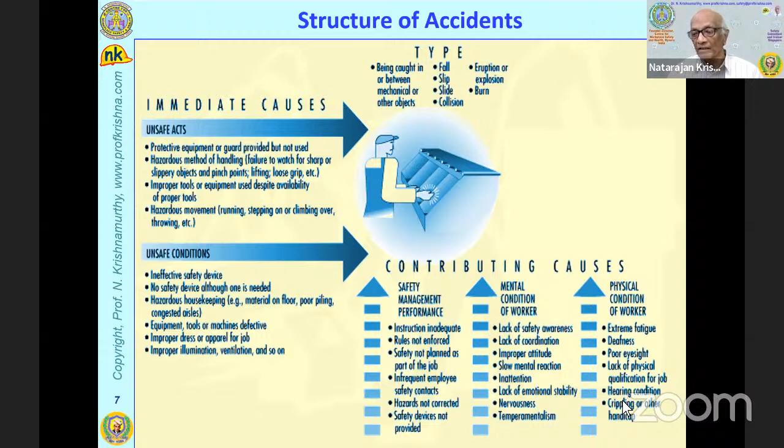You know, I stayed in the West for 20 years and also have visited it frequently. I see one difference between West and East. We are ashamed of our mistakes. The West is not ashamed. They are not proud, but they want to share and correct themselves. So I think your generation, modern Indians, should not be ashamed.

It happens to everybody. Even people like Bill Gates and Einstein and so on have made mistakes. So it's okay, and it's okay to share them and then correct ourselves. And the advantage of sharing them is so that others will not make the same mistake. So why study accidents? To find out what actually happened, what went wrong, and how it could have been prevented, what and who, if any, were responsible for it.

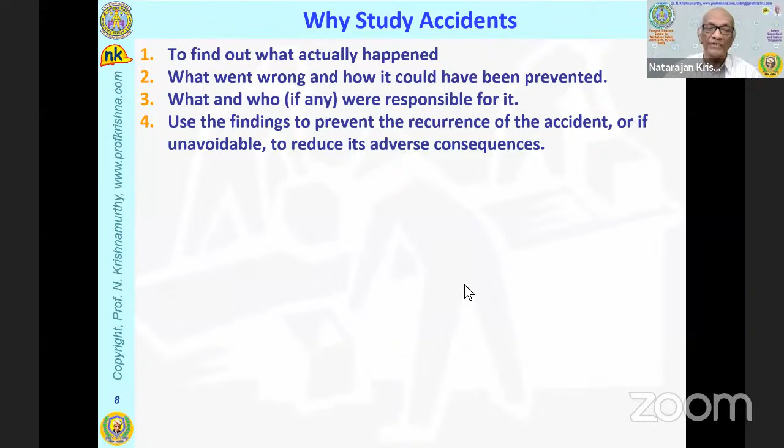Investigators do not find the culprits. That is the business of the police, the court, and so on. So accident investigators want to find out what went wrong and how it could have been prevented. That's all. They submit a report and use the findings to prevent the recurrence of the accident, or if it is unavoidable, to reduce its adverse consequences. That then leads to risk assessment and control. That's a separate topic in itself.

That is, find out what is risk assessment and control: identify the dangers that can cause accidents. How do you know them? From accident study. So it's a cycle. Assess the likelihood, the probability of its happening, the severity when it happens, how bad it is, determine the level of the risk, determine and implement the appropriate controls. This is risk management. Risk management, therefore, is a leading indicator. It's a predictor of what can go wrong.

So people must now get interested in risk management. The government of India is also planning to bring that in as part of the Factories Act. Risk management is a predictor of accidents. For workplace safety and health, it's essential to anticipate and manage accidents. So you see, why study accidents? You investigate an accident, you find the causes, then you do the risk management that can help you prevent accidents. So if you want to prevent accidents, reduce accidents, you must investigate accidents.

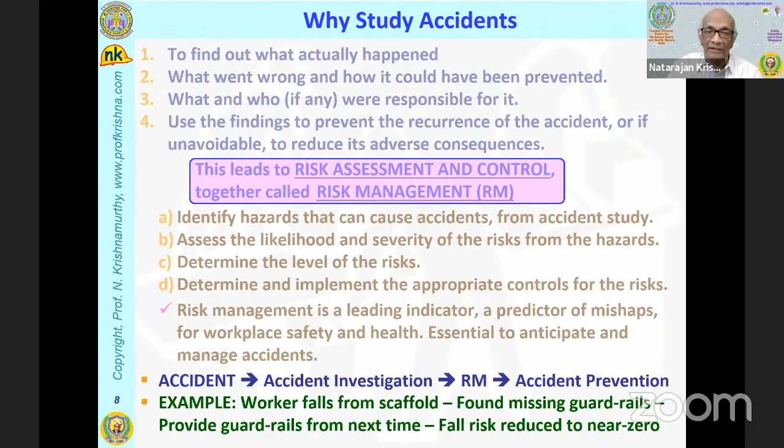As simple as that. No use in hiding them, no use in being ashamed of them, no use in covering it up. You cover it up, it will come back and haunt you. It will hurt you. So for example, suppose a worker falls from the scaffold. Accident investigation reveals there were no guardrails in a certain portion. Then provide the guardrails and the next accident won't happen. You cannot reverse the time and make the accident not happen, but at least you can prevent it from happening again. So that is why we study accidents.

So what is forensic engineering? The word forensic, very simple, comes from the word forum. And the word forum means a group meeting, a group discussion. The only difference is in this group discussion, we do not want to just gossip, just chat and so on. We want to be able to prove what we are saying is right. What we found is correct, not a guess, not an opinion.

So forensic engineering means evidence, facts, logic, and future help. No opinions unless it's from an expert. Even then it will be counted as expert opinion and not evidence. So I'll give you more examples. Forensic means it must stand in a court of law. Whatever you say should not just be satisfying to your wife or children or husband and so on, not to your family alone, not just so that everybody will praise you.

Oh, how smart my boy is.

But it must stand in a court of law. And it may not be exactly what you think. There are lawyers on both sides. So today forensic means appropriate for court of law or for public. Panchayat is okay. It doesn't have to be a state court or a federal court, a central government court or

Supreme Court. Panchayat, any group of people who are eligible or qualified to judge relating to debate or argument, rhetorical, that is, people must be able to speak and express themselves. And it must relate to the use of science or technology. It cannot be philosophy. You cannot prove.

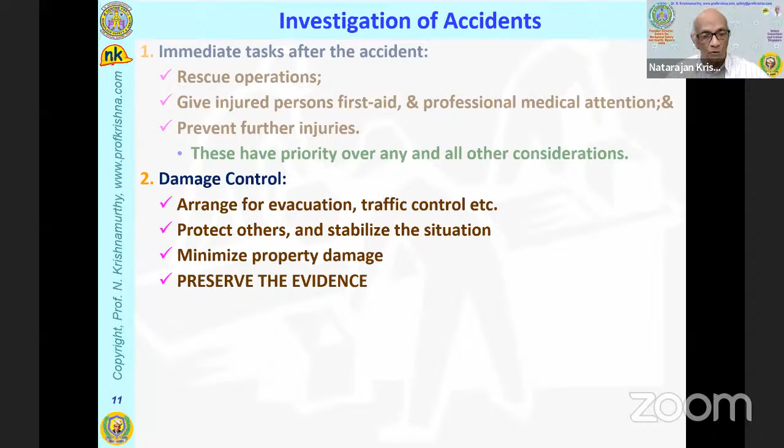First, gather preliminary information. Visit the site. This is not always possible. My experience, I'm called after everything is over, cleaned out and so on, but I'll talk about it. Collect the facts, collect data. Do the interviews of eyewitnesses, and then collect CCTVs and so on, all the data, then analyze the data. Experimental analysis, mathematical analysis, or other methods. Then do the report writing. This is the procedure.

Further considerations: report the accident first to a designated person. Unless you are the boss, don't think you know everything and keep quiet. Don't inform the family immediately, because wrong information will go there. Inform your boss, your designated person, correctly observe the conditions, take pictures. If you have a camera, and today everybody has a camera, record it, but don't arrange things.

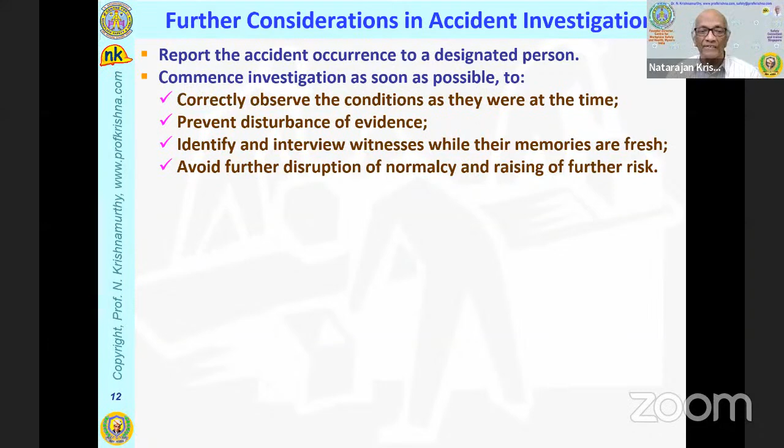Prevent disturbance of evidence. Identify and interview witnesses, avoid further disruption of normalcy and raising further risk. The more people gather, the more risk there is. Personnel, facilities, pencil, paper, this is for the investigator. All of this you must have. If you are an investigator, you need everything. You must plan for it. You cannot just go there and say bring me a paper, bring me a pen and so on.

Legal criteria and constraints always take precedence. Sooner or later, the case may go to court, especially if there is major injury or death or property damage, it will go to court. So it is the lawyers that will argue and the judge must decide. So everything that you do must be legal. If it is not legal, it's only philosophy and it may or may not stand up in court.

Report the findings, make corrective and proactive recommendations, develop a plan for corrective action, implement the plan, evaluate the effectiveness, and make changes for continuous improvement. What is the whole purpose of this exercise? We want to reduce the accidents. So if it is just a paper published or an award or a medal or something, it's no good. What you do must end up in improving the life.

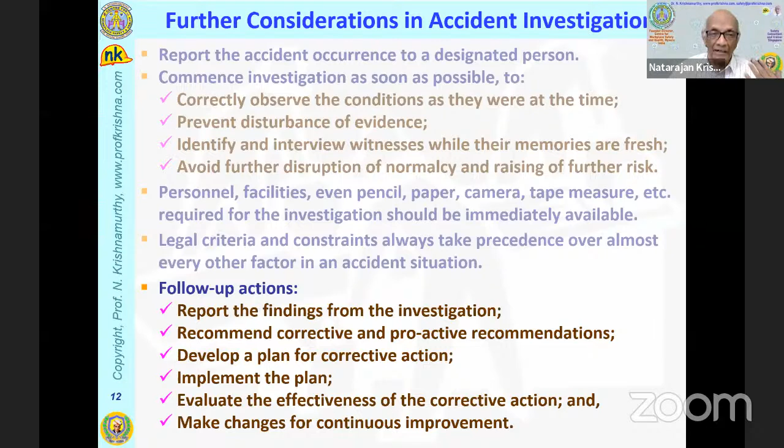Your active participation in it must leave this place better than you found it. In fact, even the definition of an engineer is somebody who solves problems and leaves the world better. Today, we are leaving the world worse than it was. What are the basics of forensic engineering? Physical evidence. Evidence, evidence, evidence. If it is not evidence, it is just gossip. Just because a big guy says, I think it should be like this, I think it was him, it won't fly.

Before attempting to gather information, examine the site in a quick overview. Take steps to preserve the evidence and identify all the witnesses. Talk to them before they get mixed up. Somebody saw something and he speaks to his friends, and his friends pat his back and say, it's not like that, fellow, it should have been like that. And slowly he changes his mind. Also people forget. And people imagine things to become heroes, or so they won't be villains. So even if it is a mistake, he says, no, it cannot be. So in fact, interviewing witnesses is an art. There is a whole training course for it.

Now, in many jurisdictions, the accident site must not be disturbed. There will be a yellow tape or a red tape and people must not come in. Normally, in most advanced countries, next to the ambulance, next to the police, come forensic engineers. Only then the family, weeping and so on. That's okay, but they're not going to help. In America, I know for a fact, the forensic team goes with the ambulance or the police. In fact, sometimes the forensic engineer gets precedence over the police, unless somebody's life is in danger. Then the police come in only to see if there is a crime to be charged. So in India, I think we have got a long way to go.

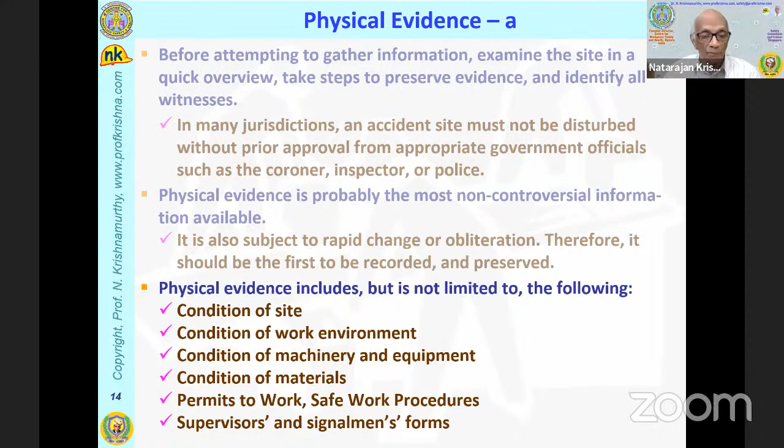So it's all based on documentation. Then if you're asked to investigate, in the olden days, we used to sketch by hand. Even today, hand sketching is a skill because photographs may not indicate some of the details that you want to show. So you make a quick sketch. So the investigator must know sketching.

He cannot say, hey, come here and sketch this. That is not a good investigator. He must know what he's doing. He must be able to do what he wants others to do, unless it's too heavy to lift and so on. Distances, dimensions, directions must be noted, even approximate. Broken equipment, debris, samples of materials may be removed for further analysis.

Take a photograph, make a note, then remove it and see what is underneath. Don't go and move it up. Oh, I got to see what is underneath. Because how it was covering, why it was not moved, all these will become important. Even if photographs are taken, written notes about the location of this.

These days, of course, your cameras record even latitude and longitude. So metadata is very useful to you. But in the olden days, we had to make notes for every picture you took. I used to do that. Then you must remember to take permission. This is something which I have seen happen in the US.

Somebody takes a picture and presents it in court, and somebody's face appears there. He can immediately make a stop and say, this photo, he didn't take my permission. I am not interested in appearing in public or in court. So it is removed from the evidence. So if you're including somebody recognizable, then you must take permission to enter the site, take photographs, talk to a person.

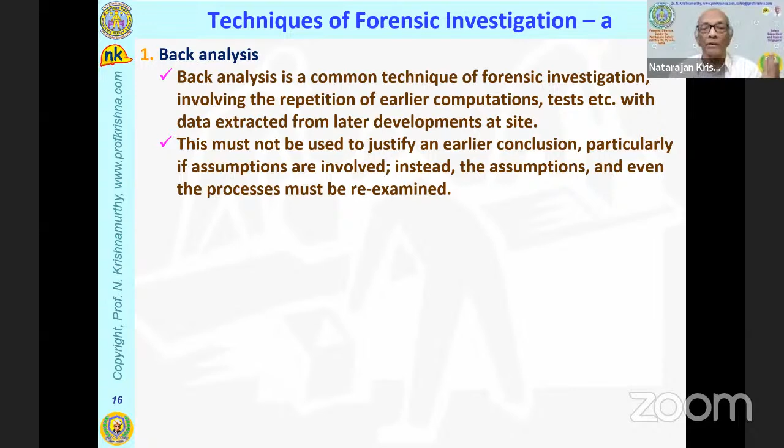In fact, you don't know the properties of soils. Many times the accidents reveal the true property of soils which you have assumed wrongly. Many times an accident shows you something which you did not include in your computer analysis of structures. Then rebuilding. For instance, put back together whatever was broken. Then you may see which one was bent or broken into more pieces, which failed first and so on.

Simulation. Simulation can be physical simulation or computer simulation. Simulation is imitating and creating a similar situation. For instance, you can simulate a scene by actors. Many times you see a video as if it is very real, but it is actors. Who is holding a camera expecting an accident to happen? These days, CCTVs, of course, are your best friend. Many times, today's police and doctors have a very easy life compared to the days I grew through.

Because today, somewhere or other, in some serial, some story, some movie, there's that CCTV, this CCTV, and then you capture the victim. And in America, they're very familiar with CCTVs. The robbers come with face masks and they wave to the CCTV.

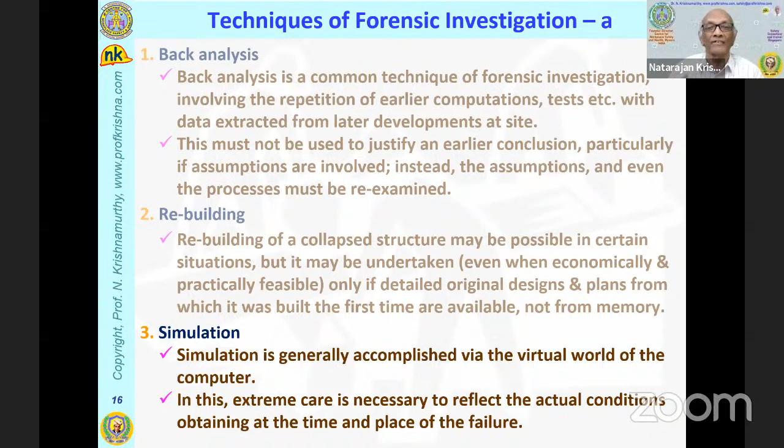But there are techniques available today where, from the eyes, which they have to keep open, they enlarge the eye, they pixelate it, and they do some magical things with it, and you can even see reflections of others in the area. I'm talking too much because I'm so excited about what is possible in forensic imaging. Simulation is a very common thing. I have done a lot of it myself.

Reenactment, of course, is risky because you are talking about putting people into the scene. Reenactment means, suppose two people fell down somewhere, you cannot make two people fall again. So reenactment is for not so injurious, not so risky things. You can make them. Show me how you walked, then these actors will walk. Was it like that? No, our shoulders knocked at each other. So walk so that shoulders knock at each other. Could it have toppled this pillar?

So that is reenactment. If the investigator decides to rebuild or reenact, it must not result in a repetition of the damage. Reenactment means don't repeat the injury, don't repeat the damage, only repeat the action, so that you can see the reactions, you can see the movements, you can see what causes a shadow, so he did not see where he was going. So stuntmen are often employed for reenactments.

Root cause analysis, in fact, is a very interesting subject. How do we find what could cause an accident? There are many, many methods. I may not have time to talk about it. Fishbone is a very common one. Ishikawa, a Japanese scientist, thought of this. And it's very commonly used to go backwards from accidents to find, could this have caused it? Could this have caused it?

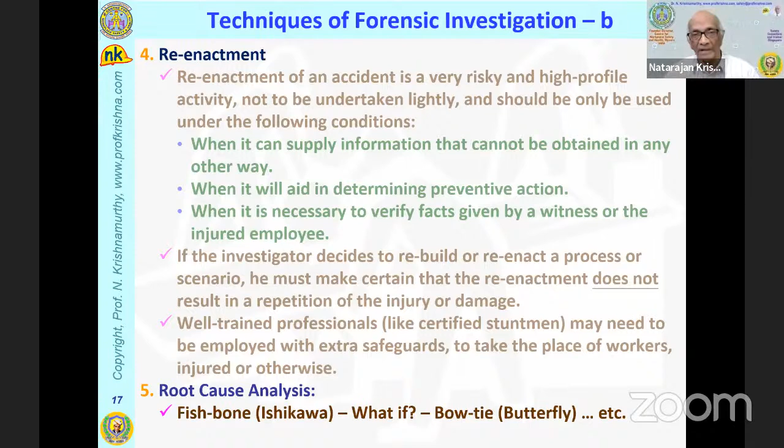I have been an expert witness. Who is an expert witness? A forensic engineer investigates accidents. But then it has to be proved in court. Not all forensic engineers are competent to present it in court. Because to present it in court, as I said in the opening remarks, you need to have a very good background in whatever you are talking about.

You can talk about anything, but you must show it. Is your PhD in that? No, sir, my PhD is not. Then why are you talking about it? Oh, because I worked in this company and in this area. For how long have you done this? One question a lawyer may ask you is, a 50-year-old American lady fell in a tourist spot from 20 meters. So suppose I go as an expert witness.

The other lawyer will ask, have you had experience of a 50-year-old American lady falling 20 meters? No. No, but... no buts. Yes or no? No, Your Honor. You cannot say no, sir. No, Your Honor. Then why do you feel qualified to do that?

Okay, this has happened. So I say, I investigate accidents of 50-year-old Asians. I've seen accidents of falling 20 meters by others. And I've seen accidents of Americans and Australians and so on. So I put it together, and as a person with enough scientific background, I am able to put it together. The judge will rule, okay, you are qualified as an expert witness. If you cannot say any of these, goodbye, thank you, sir, for your time, the next witness.

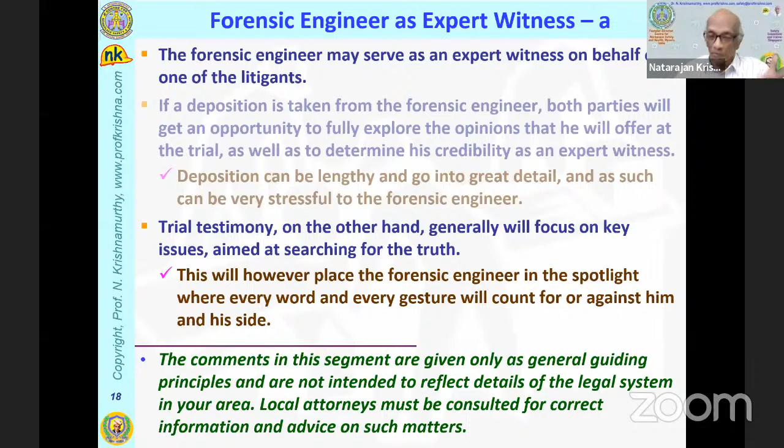Suppose in America, for instance, one was divorced recently. Then they'll say, what was the state of your mind? Your wife divorced you last week. How do you think you are capable of judging this? I don't want to frighten you, but it's very challenging. And when you feel on top of it, you feel so good. Trial testimony, anyway, I will not talk about again, another talk maybe.

So a forensic engineer is in the unique position of not being part of the dispute. A lawyer has to argue for his client. A forensic engineer as expert witness has no client. Even though one of the parties will pay, he's not expected to prove his client is innocent or guilty. He presents scientific fact. If he argues prejudicially in favor of one side or the other, he'll be kicked out. He will become the laughing stock of the entire professional community, and he won't be called as a witness or an expert again.

Anyway, if both sides agree, they can have a mediation and so on. And he must be non-partisan and pursuing truth. Satyameva Jayate is applicable to forensic engineers. Maybe it should apply to all engineers, but they all have agendas. He or she is often treated as amicus curiae, friend of the court. He is supposed to be a friend of the court, not a lawyer for one side.

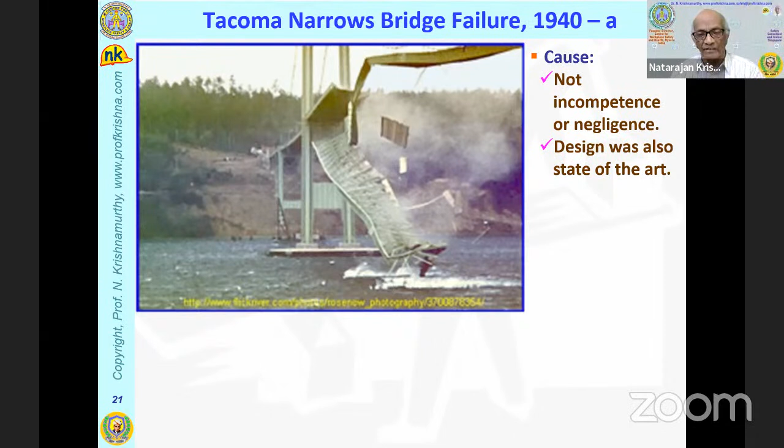So I will now take a little time on famous, or maybe not famous, notorious, structural failures. I'm limiting myself to what is well known. Many of you may also know them. I'm putting it chronologically. 1940: before that there were failures, but not enough forensic engineering. This is a famous bridge, the Tacoma Narrows Bridge. It was not incompetence, it was not negligence, and the design was state of the art. It was built well, designed well as far as the knowledge went, but it was simply insufficient knowledge at the time. Nobody is to blame.

But they found out what the problem was, something they had not known: resonance of flexible structures under aeroelastic flutter, vortex shedding. When something is moving, the wind becomes a vortex like a spiral, and that makes a resonance oscillation. It was not known at the time. After that, a lot of research was done. Luckily, no human life was lost, and the failure led to significant advances. I'll show you a 1-minute video on how it went.

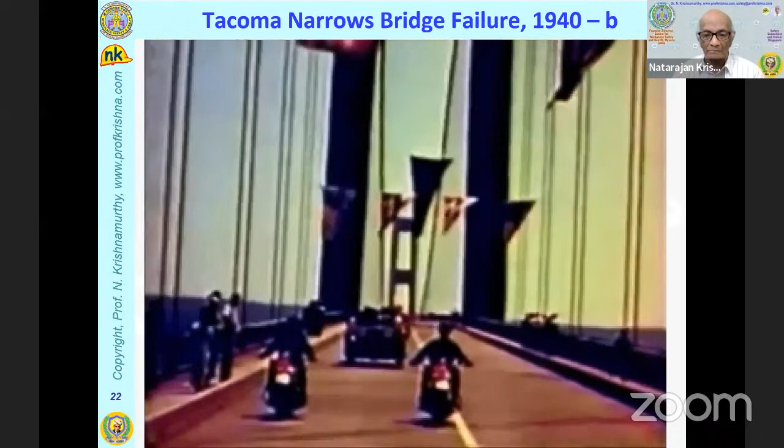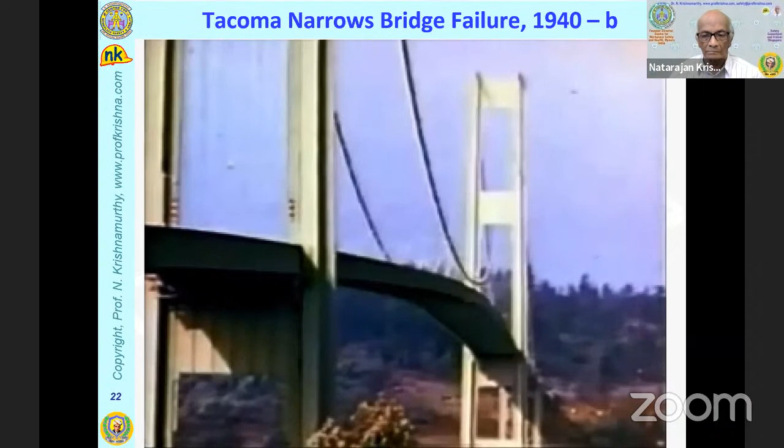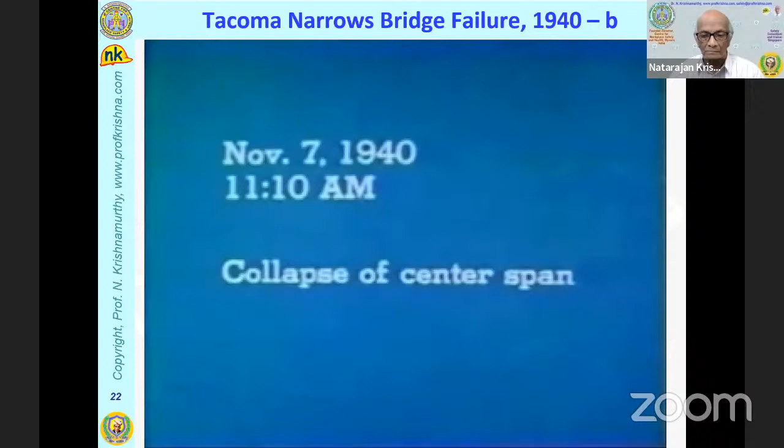As you can see, this bridge was exceptionally long and narrow, over half a mile long, only 39 feet wide. It lasted just 4 months. Here's opening day. And then the gusts started. On November 7th, the bridge suddenly went into a twisting motion. The wind speed was a steady 42 miles per hour. This was enough to keep the bridge oscillating in one of its natural modes of vibration with a period of 5 seconds. Real time. It's remarkable that the girders were this flexible. This is photographed at normal speed. However, a collapse was inevitable after a little more than an hour of this. Collapsed.

Okay, the reason I showed that was not how exciting it is. That was in 1940. 60 years later, a similar thing happened. In spite of all the computers, all the technological advances we had made in 60 years, still a similar ignorance. In 2000, the Millennium Bridge in London was opened by the Queen. It was designed by the world's top designers, built by the world's top erectors and contractors, and the Queen cut the ribbon, and watch what happens. It is just half a minute, but watch.

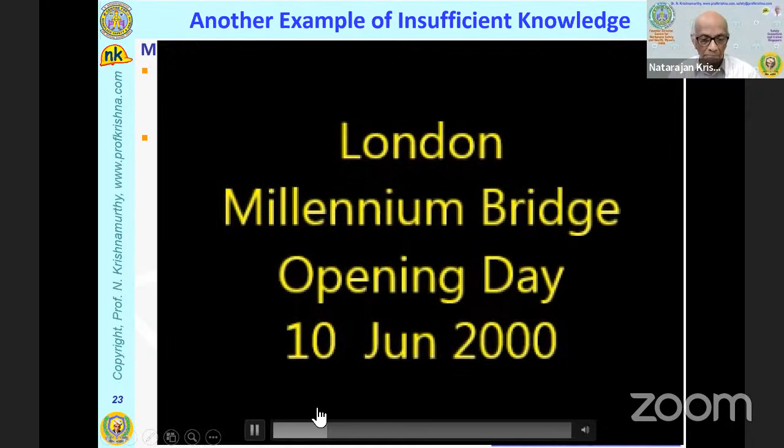This is opening day. Just after so much knowledge, it goes to show that human beings are catching up with nature and with the world. There will never be a time when we understand everything, because then we won't be human.

So it took them 2 years and 5 million pounds to correct it. If that was vortex shedding, this was called synchronous. They give nice names after they find something, but it shows that human beings are still chasing reality, trying to find the truth. But now they know.

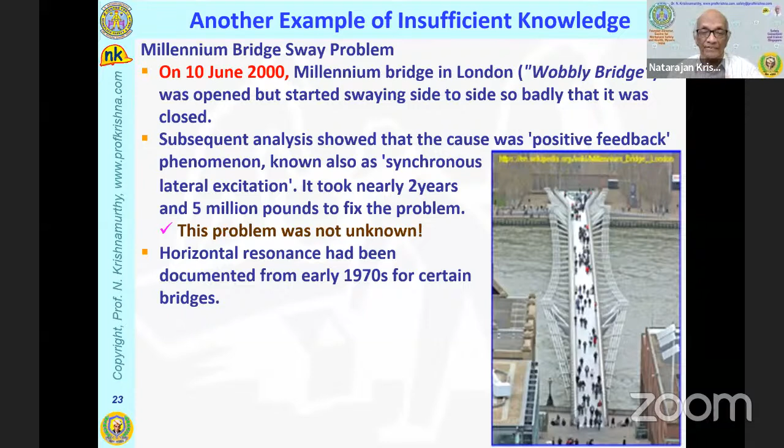So it's very costly. But in this case, they had no excuse, because horizontal resonance had been documented from the 1970s. They didn't read the right papers. It depends on luck also. If they had read one paper, they would have put it into the mix, conducted a risk assessment, and done some calculation. So I will show you a few more before I go on to my own stories.

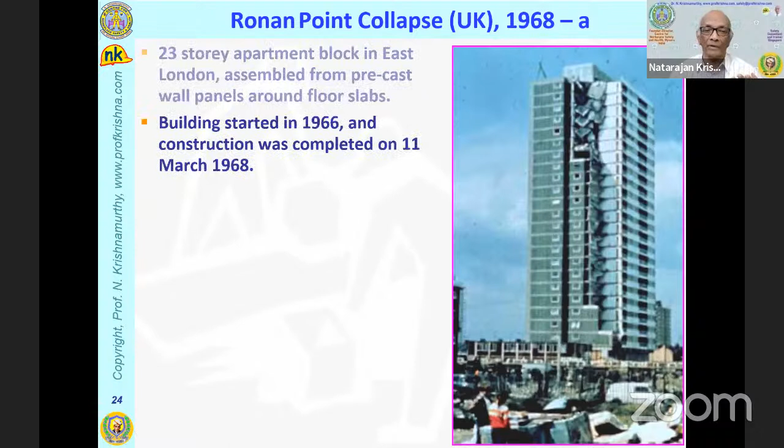Then this is UK 1968, a 23-story apartment, East London. It's very simple. It's an RC structure, okay? And a gas leak on the highest floor blew out the wall. It was a precast building. So the walls were precast, the slabs were precast, and they were supposed to be connected very integrally by in situ concrete. But of course, like human beings, they found newspapers inside the concrete. Don't worry, it happens all over the world. It may not happen again, but it happened then.

So when it blew out the wall, the ceiling could not support itself, it fell down. The connections were very bad. When it fell on that floor, twice the load and shock impact factor, the next floor fell. So it fell floor after floor after floor, and the entire floors collapsed. Very embarrassing. 4 died and 17 injured. They conducted a lot of tests, and to give them credit, they found that workmanship was not perfect, and no structural redundancy.

I'll take a few seconds to explain this. Redundant means extra. Now, I'll talk to you honestly. If as an engineer, designer, I tell my client, you know, this 4x8 steel beam is enough, but I suggest we give 5x10 so that we'll have something extra for emergencies, he'll say, goodbye, I'll go to somebody else.

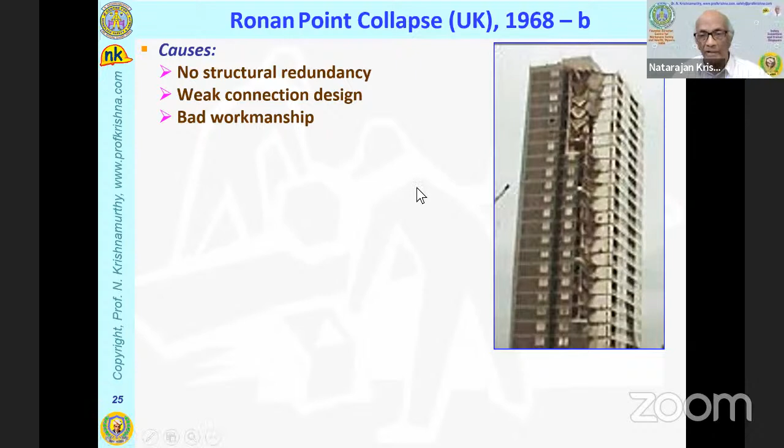But today it's not going to happen. Whether it's America or India, redundancy is a bad word, but bad workmanship can be corrected. And it led to major changes in building regulations covering safeguards against disproportionate collapse. New buildings were supposed to take even the explosive charges, and existing buildings were allowed a little bit less.

And then, because one block was found to be bad, they felt that they could not trust the others. All the 9 blocks were demolished. Of course, the contractor lost. Maybe the insurance covered most of it. But look at the brave decision they took.

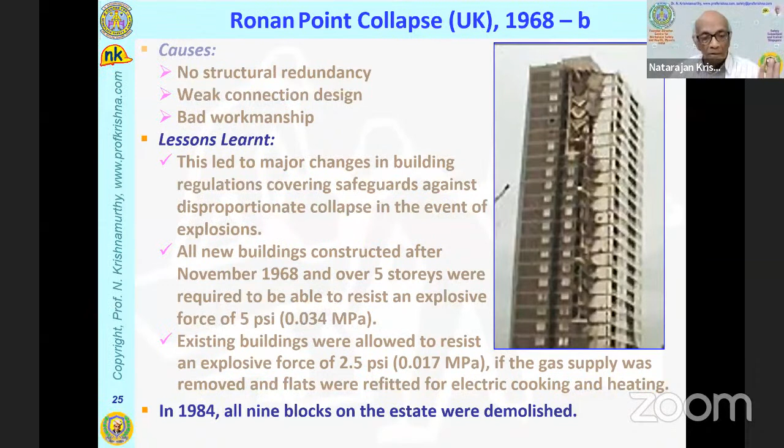Contrast it with a common practice. I won't mention the country. A common practice of a building designed for 3 floors. And after that, the new buyer adds 2 floors. His son adds 2 more floors, and then there's a collapse. So they demolished all of it because they didn't want to risk it.

Coming to computers. I was with mainframes in 1959 in the US. So don't think because I am old, I don't like computers. I love computers. I spend 6 hours a day with computers. Okay. So this was the first 3-dimensional truss design program by computers. I have done similar things because in those days, there were no packages. There were no teams. Most of it was a one-man show. You wrote the program, you punched the cards, you took it to the computer center, you checked the answers, and you proved that your answers were right by experiments and so on.

So this one-man or 2-man show produced a computer program in the 1970s. That was when 2-dimensional programs were fairly established. 3-dimensional programs were just coming into vogue. So there was a stadium, and for the roof, they used this 3-dimensional pod. It's like an inverted pyramid, and all these put together for a 110 meter by 91 meter space frame. It's not a plane frame, it's a space frame. And it served for 5 years.

It was built in 1973, served well for 5 years, but somehow in 1978, overnight, it collapsed. Just a few hours before, in the evening, there had been a huge game and thousands of people were sitting there. Somehow they were lucky, because if it had collapsed when the stadium was full, thousands of people would have died.

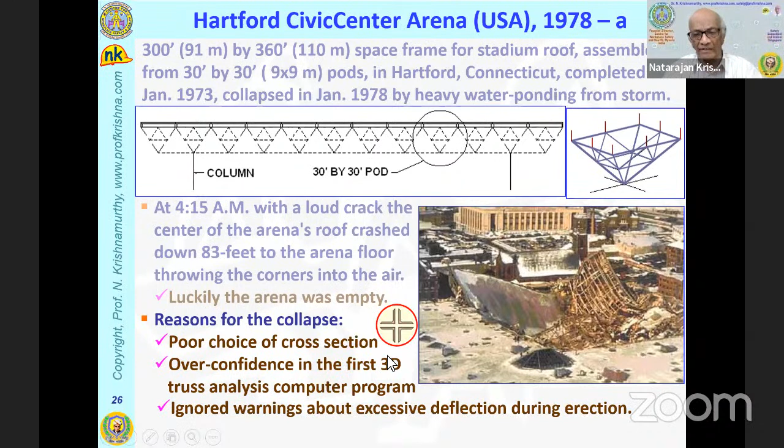So reasons, many reasons. Structurally, for instance, if I gave you 4 angles, how would you put them together for best effect? Common sense tells us it should be square. But for some reason, probably thinking of connection being easy, they put it exactly the other way around. Instead of putting it this way, they put it this way. So that meant that the moment of inertia, the radius of gyration were all very small. So that was one reason.

Then the overconfidence in the computer program. Even today, especially the younger generation is so confident about computers. They are thinking computer is better than my mother, my father, my teacher, Mata, Pita, Guru, Devo, beyond everything. These were written by human beings. Whenever human beings write it, it cannot be perfect. I'm not against human perfection. But once you become perfect, we reach a higher plane anyway.

So they assumed that because the computers did things fast, what they took 1 week, it did in those days in 5 minutes. Today, it will take 5 microseconds. They thought it was terrific, tremendous. So they believed in it. And it started warning them.

I almost give a soul to structures. I say the structure is screaming, trying to tell you something. I'm going, please help me, please save me, or please get out. Even if I die, I don't want you to die. That's what the structures tell you. But we don't listen. It has happened in Singapore. It has happened in Bangladesh. It probably is happening in India. Why probably? I know it is happening in India.

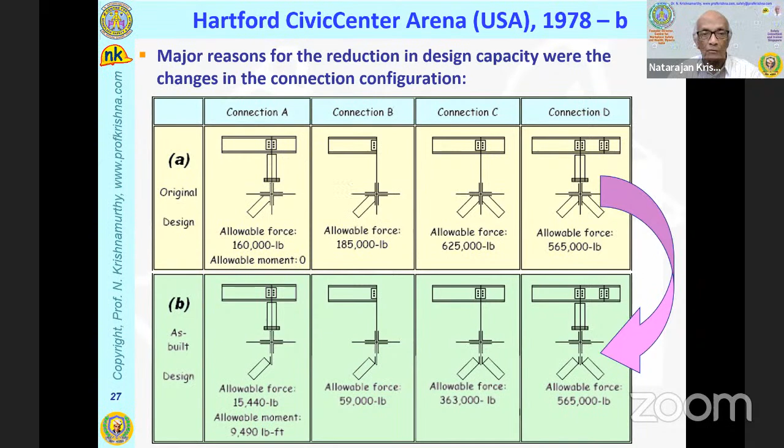Look at the allowable force in the design, it was designed for 160,000 pounds. But once he moved it, it can take only 15,440, 1/10 of it. 1/10 of it. And it put in moment because it's eccentric. Similarly, second, third one, only the fourth one, there is no change because it happens to be symmetric. So you see the problem? And this is going to happen again. I got 1 or 2 more cases of that. So that is the reason.

And after that, of course, they found, after analysis, they blamed the program and they blamed the people who said, don't worry about the deflections. The computer program has said that, you fix it somehow. So this was the way they went ahead and did it. 3 outcomes: the compression members, the fabricated ones were overloaded, the compression members were overloaded, then all the members were overloaded because of the shifting of the connections.

In addition to the design errors, there is bracing. Bracing is to prevent a long buckling length, you brace it in the middle so that your load capacity increases 4 times. I think you know that. So midpoint braces were omitted because bracing was not considered that important from a computer program point of view.

So they merely followed the computer program's directions and forgot their engineering background. Then the bracing, instead of 15 feet intervals, they put it at 30 feet, and then insufficient bracing. So all these put together, depending too much on the computer analysis. I am trying to share some lessons. Computers, however, are only as good as their programmer, as good as their software. And one shouldn't be too arrogant that he has done a good design. It depends on the software.

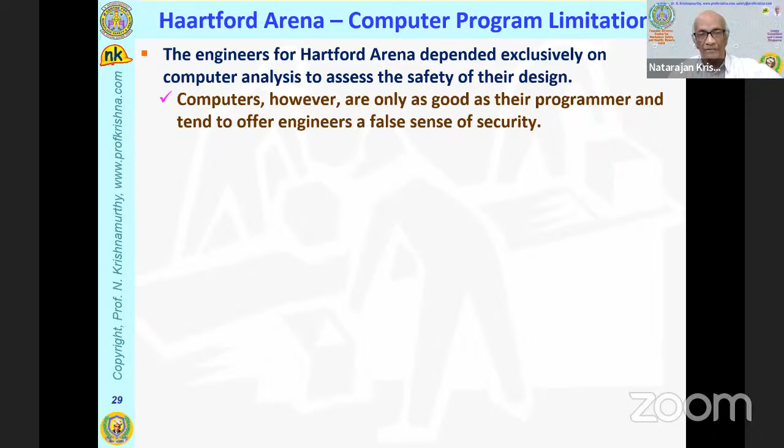Public was thinking, oh, the computer is a blessing. It's a panacea for all ills. It's a blessing to mankind. I want my children to learn computers. The computer is the silliest, dumbest machine in the world. It can only count 0 and 1. It's the programmer. It's the program. And programs have been gradually improving over the last 30, 40 years. Today, almost all programs are as near perfect as the existing knowledge goes. But unfortunately, I'll point out some limitations.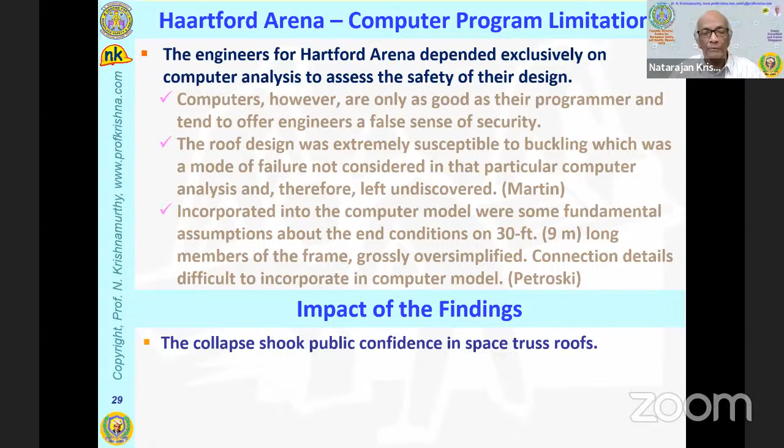President Ford of the United States said, this is one example, let us check all the other things and let us do water load testing when there are no people present. And then they said, let the programs grow slowly. That's what they did. Okay, then the lessons learned, of course, I'm repeating: ensure that the computer analysis covers all the modes of failure. If it cannot, check it out by conventional methods.

Very unfashionable, very unpopular. I tell my class, okay, you got a software program. I'll give you a simple example. You do it by hand. By hand? Me? I know I can do it on this small work laptop. Why do you want me to?

I wrote a book on computer graphics. My nephew tells me, Uncle, why did you write a book on computer graphics? I touch C, I get a circle. I put R, I get a rectangle. Why do I need it? So if I ask you to draw a rectangle 3 inches by 5 inches, what will you do if you don't have a computer? I won't do it. I don't want a rectangle. God help them. God help them.

I learned this in the United States, not in India, not in Singapore. If you want to get something done, regardless of time, unless it's a very complex thing, at least the simple version of it, you must be able to do it by hand. Including sticking up strain gauges on a structural specimen.

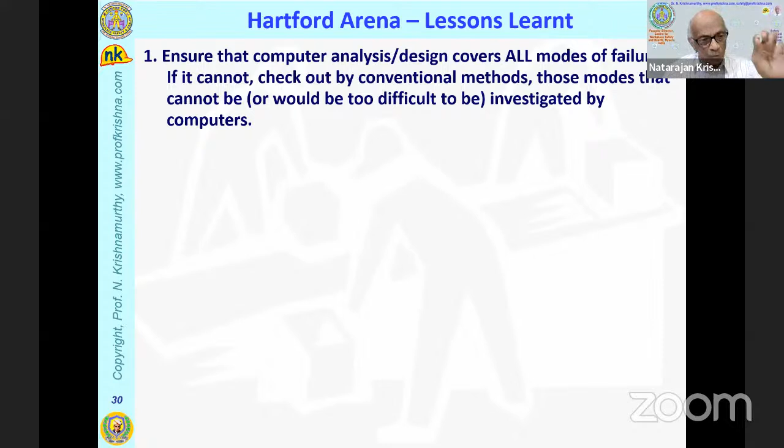What I'm saying is, check out by hand one simple example of anything you want to do. You want to calculate the moment of inertia of a complicated thing? Try to review your background, do one simple thing and see if the computer gives the same answer, and then let the computer do it. Anyway, I shouldn't sermonize too much. I've got so many more slides.

When any change is made, analyze, reanalyze. Hartford, Connecticut, America, forgot that. Singapore, in one particular case, forgot that. People forget. One analysis, they get a beautiful design, and somebody makes a change. Oh, that's just a small change. You are going to see one small change killed 114 people.

And the change looks so logical. If I ask you, you'd say that's okay. Instead of 10, I put 2 times 5, 5 plus 5, it's the same, isn't it? No, it's not the same in construction. Heed warnings. This is the third lesson learned.

The structure is trying to tell you something. It happens again and again and again. In Singapore, very rare failures, one failure, the structure has been screaming for the last 3 years. Cracks on the wall, patched it up. Tiles fell, bad tiles, stupid fellow, put new tiles, get insurance. Column broke. If it had a voice, it would say, I have been trying to tell you, I'm not strong enough to take all that load. Somebody made a mistake in design, killed 30 people in Singapore.

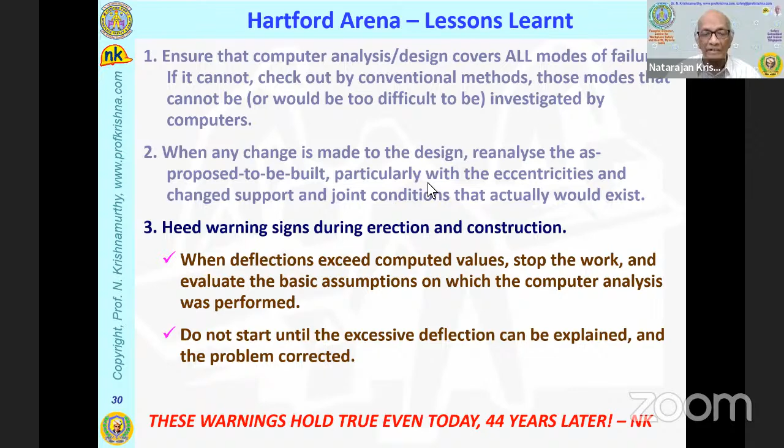Now, 1978, by then computers had made some progress, and scaffolds had made some progress. It was a new scaffold system. Cooling tower, as you know, is necessary when you use a lot of power and a lot of hot gases are escaping in your energy production. And so you want to cool it, you put water in it and let the water flow up, and then it cools in a certain area so that you send cooled water outside. And this is the cross section. This is a typical cooling tower, 2 of them. The second one was being built with a new scaffold system, which they were not familiar with.

And then suddenly on one day, when it was at this level, and it's again another small video.

The scaffold and construction system began to collapse as the top layer of concrete crumbled. Starting at the north end of the tower, the concrete and scaffold peeled off in both directions, detaching from the rim and falling inward.

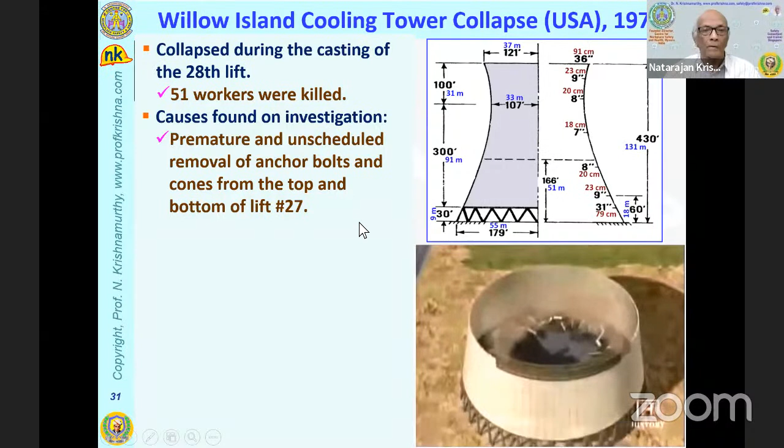So on investigation, they found many, many problems. When an accident happens, you must allow a detailed investigation and you must document everything so that we can learn and others can learn from it. Unfortunately, most of the information I get is from America, next from England. Japan has lots, but it is in Japanese language. Australia is okay. Singapore is very good. Of course, it's a small city, 4.5 million, 5 million.

51 workers were killed because they were all working on the formwork. And then 2 or 3 problems. One, this formwork was supported on the bottom layer. They removed things too soon. They did not connect it properly, and it had not been cured correctly. Too early removal of formwork. Then they were not familiar with the formwork and repositioning of the crane ties. They moved the load pickup point a little farther off. It caused more moment. Not all the way around. One point, it's enough. It's a domino effect. One failure, it encourages another failure.

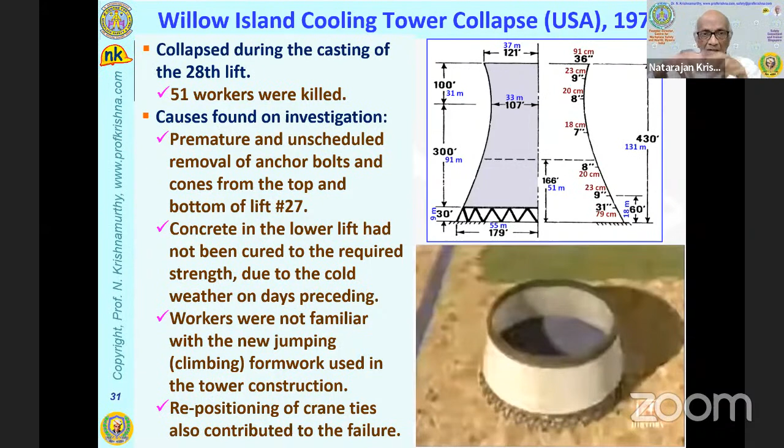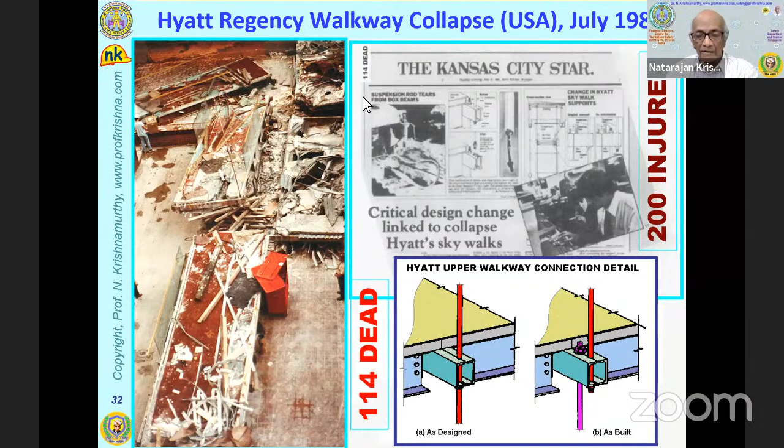This is probably the most famous case in the world. Probably everybody who talks about forensic engineering does this. I'll try to be brief about it. 1981, this was a very famous hotel and very fashionable. And one night, after a few years of building it, there was a dance, and on the corridor in front of the rooms, people started dancing, and it collapsed. And on the left-hand side, you see the collapsed portion. And the point was very, very simple. The contractor, the fabricator made one change. Remember Hartford? Similar thing here. There at least it was complicated. Here it was simple.

This was the graphics of what it was. Level number 1 at the bottom, man walking. Level number 2, level number 3. That is floors 2, 3, and 4. They were on opposite sides. These two were suspended by design by one rod. This drawing shows 2 rods. One rod from ceiling to the top balcony, top floor, and then the other rod from the top to the bottommost. So this was the change. The original was a single rod, threaded all the way, because the nut had to go all the way from bottom to here.

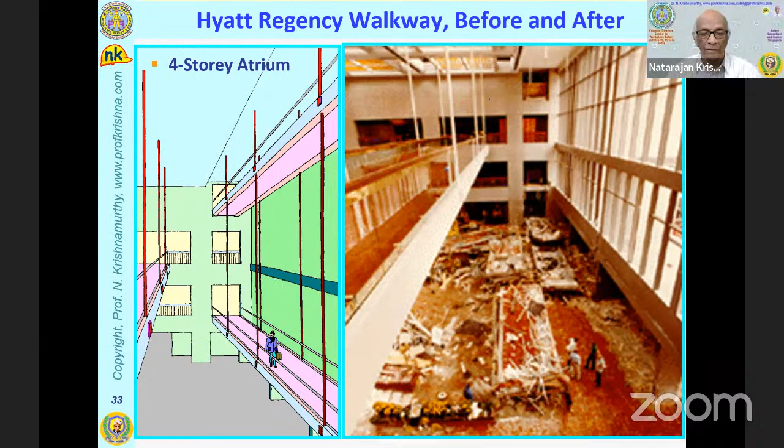But after the failure, you notice this, the left-hand corridor is here, but the 2 right-hand corridors are down on the floor. This is the morning after the event. So this is a disaster area. This is the bolt pulled through and channels pulled through. And this was the simple substitution. Originally, it was a single rod. The nut had to be turned all the way from the bottommost floor to the topmost floor. That was the problem with the fabrication. So he simply substituted one rod from top ceiling to the top and another rod from the top to the lowest.

What did that do? I don't have time. I put it to you as a challenge. Prove that you all are engineers. Most of you have had statics and free body diagrams. Prove that when you moved from 1 to 2 rods, this nut would take 2P.

It's correct. I give it to a PhD; if they have not looked at it, they will be confused. But it's very simple. It can be taught to a high school student. I leave it to you. If you do it without consulting a book, you can rate yourself as a good structural engineer.

In Singapore, 1986, this is called Little India because it is mostly Indian shops. I don't think that was the reason. But they had a building built in 1971. 15 years it served. But it wasn't fully occupied. It was occupied slowly, floor by floor. And as the technology developed, they brought in more and more equipment, more and more machinery, air conditioning units on the top.

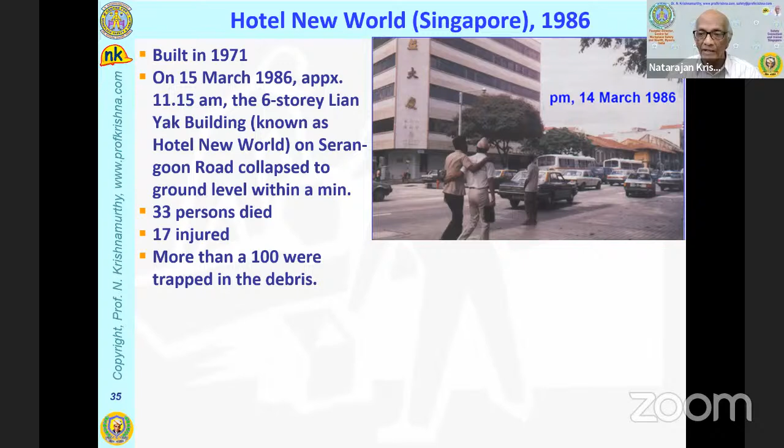And then the bank wanted one whole floor. So the bank brought a steel vault, very heavy, tons, and they put it there. It collapsed. On the 14th evening, it looked like this. On the 15th morning, it looked like this. Early morning, the whole thing pancaked. It didn't fall sideways. It fell floor by floor. This is all you see. It's buried in the basement.

100 and odd people were trapped in the debris. 33 died, 17 were injured, the rest were rescued. And on National Geographic or Discovery Channel, there is a 1 hour special. I recommend that you see it. It's free during the weekend. Heroic, it could be a movie like Titanic. Foreign companies who were working dug tunnels from the sides to rescue them. People sent oxygen, glucose water, and medication through tubes to the people trapped below.

Anyway, I don't have time, but the reason was it was designed by a draftsman who was not qualified. And this draftsman, God bless his soul, he's not around anymore. He simply forgot to include the dead load. How it survived 15 years is a miracle. I told you, because it was not occupied fully. If it had been occupied fully the first month, it would have collapsed then. And because of the new additions like the AC compressor units on the roof and the bank vault on the 5th floor or something, it collapsed.

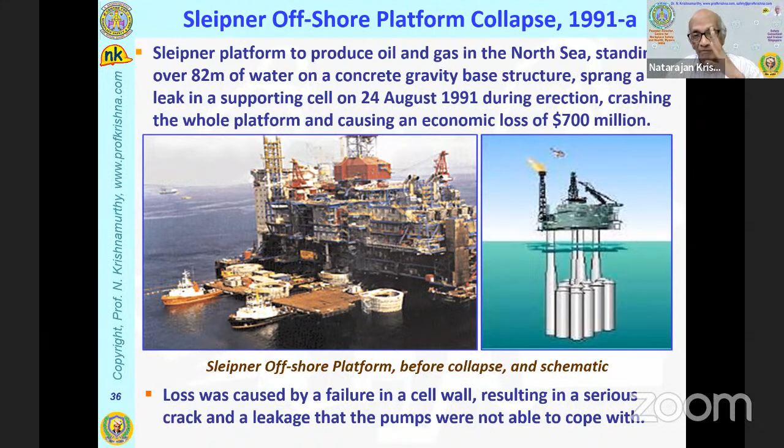I grew up with it. My master's degree paper was in finite elements. I know the initial programmers. The father of civil engineering finite elements, Ray Clough, has come to my home and eaten chapati with me. So I grew up with finite elements. I know its power and its limitations. This used Nastran, one of the biggest programs even today. It's not the fault of the program. It is the fault of the input.

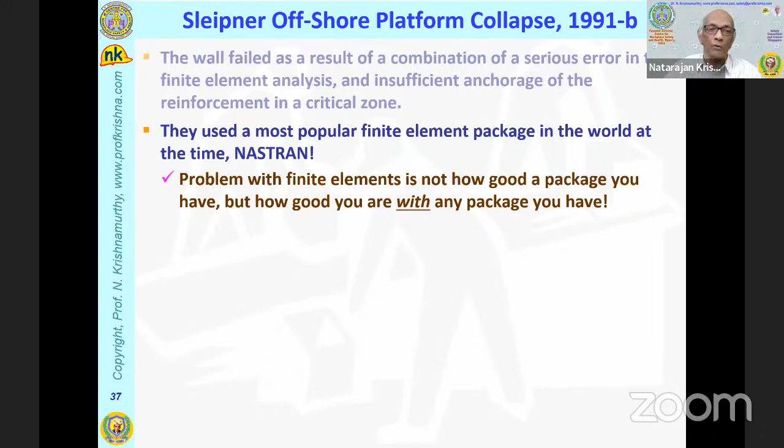There are two dangers with finite elements: input preparation and output interpretation. I have no time, but if you study finite elements, you will understand. Today, you press a button, it does it for you. You don't know what it does. You get numbers, 6 decimal places. So the mesh was too coarse.

I cannot go into details, but with finite elements, first you must decide how many pieces you break it into. For some problems, 100 pieces may be enough. For some problems, 10,000 pieces may not be enough, if it has stress concentration and so on. It's a separate subject. You must really be paying attention to it. Don't jump to it. Don't take on anything responsible until you're sure of what you're doing.

I am fairly sure of what I'm doing. I am very basic. I worry about the basics. The rest of it, the computer will take care of. But preparation of the computer model, preparation of the input, I take very good care. So today, wizards, magic, you put in 1 or 2 numbers, it gives you a bridge. Don't be too happy. You don't know what the bridge is doing.

Now, the next few slides, I cannot spend too much time. It's the very famous World Trade Center collapse, the terrorist attack on the two towers. You can get enough on the website, but I'm going to touch only on what I'm aiming at, redundancy. Okay, I'll tell you why I'm saying that.

So tower number 1, at 8:45, a fully loaded plane: terrorists took over the cockpit, disabled the pilot, and drove it directly into the North Tower. They died. They were willing to give up their lives, but they also killed all the passengers, and cut all the columns. It stood bravely, I'll tell you.

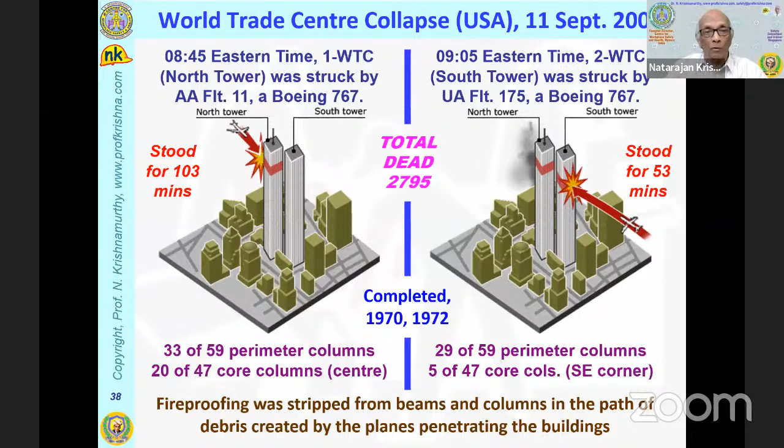When you cross the street, you run a risk. It's a known risk. We design it for what you want, what you can afford. And you're cutting our fees to the bone. How can we give you good structures? Anyway, that was a good exchange and people shut their mouths. But after that, they are giving more, and the fireproofing is increased and so on.

So I'm not going to show these slides. What were the main causes? Too large, many times beyond design loads, too hot a fire. In a landing plane, the fuel will be very little. This was a fully loaded plane, so all the fuel dropped into the lift core. So it became a tank of fuel.

And this lift core acts like a chimney. So when the fire started at the bottom, the fire grew up, suddenly very high temperature, and through all the beams, even though it was a reinforced concrete building, it was supported on steel trusses, and the steel melted.

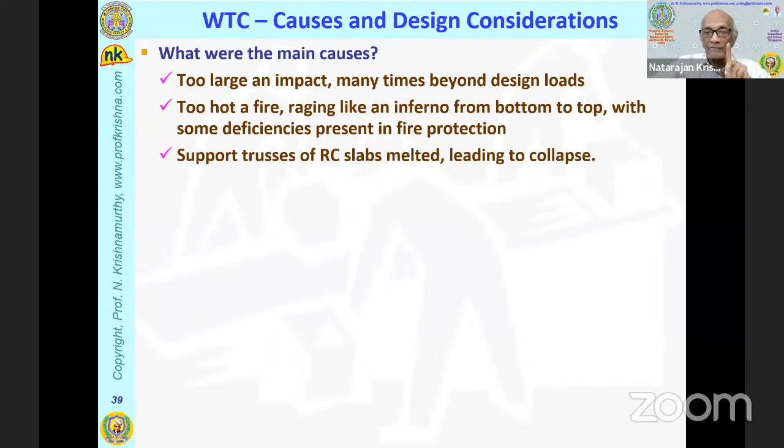Don't blame us, blame the terrorists. So did they design for such contingencies? I've already explained. We have designed for a normal accidental impact, not for a terrorist. You cannot afford to do that.

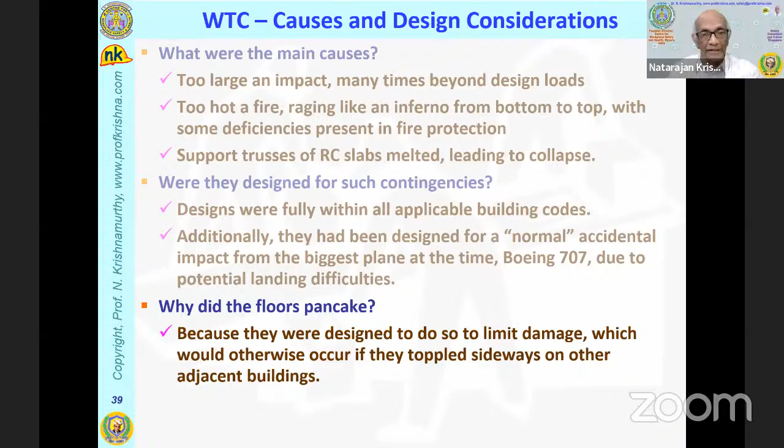Why did the floors all fall like this? Not like this. Why? It was designed to fail that way. Because if it fell sideways, a 10, 20, 30-story building will destroy half a dozen buildings, kill thousands more. So the towers were designed to pancake. Pancake is dosa, like set dosa. Thank God they only killed 3,000 people. If it had fallen sideways, it would have killed 10 times more.

Okay, some more, I think I'll skip this. Collapses, again, authorities: Shyam Sunder, an Indian settled in America, analyzed it, and there are beautiful computer graphics on this. I don't have time. The result of a combination of factors. While the buildings were able to withstand the initial impact, the resulting fires melted the steel and collapsed the concrete.

Okay. Now, this is the point I want to make. How did it stand 103 minutes? This brave building. Its arms cut off, legs cut off, but its body still stood, allowing the people to go? Redundancy. The owner knew he was putting in more money for redundancy. He probably didn't think in those terms.

He said, I want to stand at the window and I want the full view. I want to see New York, my city, from any floor. That means he doesn't want a window. He wants entire glass from top to bottom. Then who is going to carry the load? Aha. The designer put columns, mullions. The sides of the openings were called mullions. Even the sides of windows are called mullions. The sides of the openings were steel columns. They took the load and they resisted this high temperature for 103 minutes.

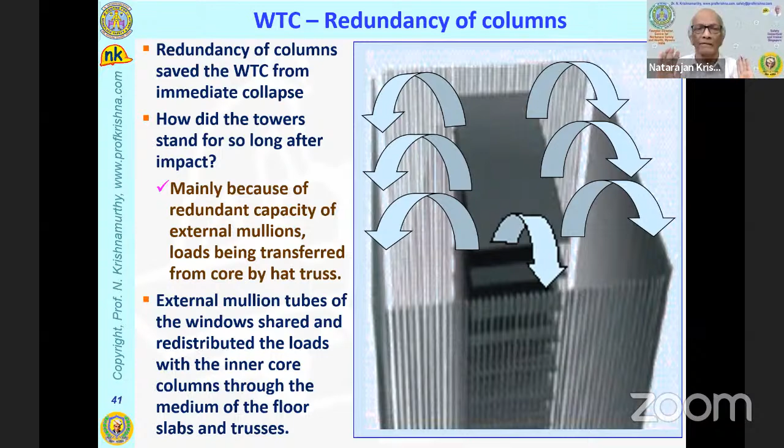That was redundancy. He didn't need so much. If he had left the openings and distributed load from the lintel into the sill and then carried it, he could have done that portion for half the cost. But today it's a very unfashionable thing. I cannot suggest to my client, you put 10% extra because you don't know how people will treat this building. They may mistreat it. So, no. I will treat it nicely. You give me the minimum. That's it.

Okay. I was lucky. My student, Mr. Nagaraj, was the chief engineer for Metropolitan New York. My students, Narayan Murthy, Nagaraj, so many people are in high positions and they invite me to view. Nobody could get into that site when it was cleaned up. It's called the bathtub because it was shaped like a bathtub. The two towers had been destroyed and they were planning two other towers. It's now built and in full swing. So he called the engineer who was cleaning up the site and said, my professor is coming, help him.

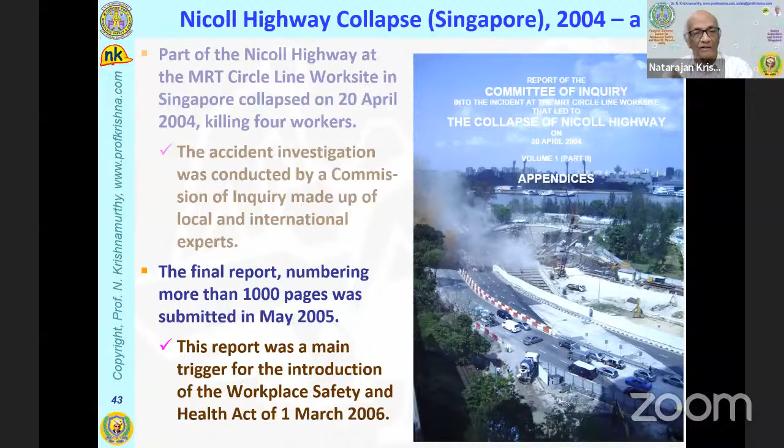A commission of inquiry made up of international experts, 12 or 15 experts from all around the world, came and investigated it. The final report was 1,000 pages long, and it made many changes. They threw out the Factories Act and introduced a new act called the Workplace Safety and Health Act. I have been with the transition for the last 20 years, and I'm teaching the changes and so on.

4 dead, only 4 dead, luckily. 3 injured, luckily again, because it was probably lunchtime and so on. Causes: under-design of the diaphragm wall. It can happen today in Singapore, which is one of the richest, and number 4 or 5 today among the safest countries in the world. It has many iconic structures, worldwide acclaimed. Under-design, I'll tell you. They depended on computer software.

Latest version. You know, I taught computer software for Hong Kong many years ago. So the night before I left for Hong Kong, the manager calls me and says, "Professor, you are giving us version 8, right?" "No, I'm teaching version 7." "Professor, we got version 8 last week." I said, "How many commands of version 7 have you used?" "Oh, about 32." "Do you know there are 100 commands in it? You used less than 1/3 and you want to go to the new version."

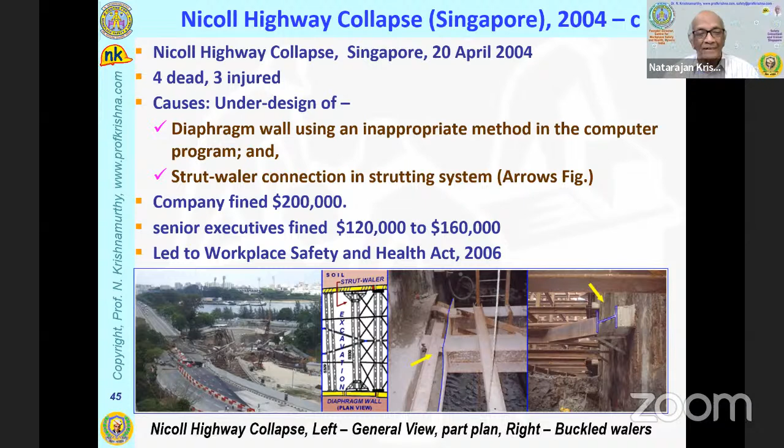Anyway, again, $200,000 is nothing. And senior executives were fined. This may look a lot, but how can you compare it to 4 lives? How much is a life worth? Sir, it is worth 2 lakhs because that's what the government pays for every death in a train accident. 2 lakhs. You create a life for 10 crores. So it led to the new Workplace Safety and Health Act.

Lot of learning there. And then Nicoll Highway was rooted in 2 critical design errors: under design of the diaphragm wall, under design of the waler connection, and not listening to the warnings given by the readings. It was very heavily instrumented because it had lots of money, you know. It's an iconic thing, the world famous Nicoll Highway. So everything was instrumented. And the instruments told them your deflections are high. Anybody would have listened. But the confidence in the program, the confidence in the PhDs, the confidence in the dozens of papers published, that program has met world acceptance. For the last 10 years, we are using the latest version.

But my friend used the wrong model. Who is to check you if you don't check each other? And why don't you listen to the screams, the cries that the instruments are telling you? If it says the deflection is 27 millimeters and your computer program said it should be 14 millimeters, don't you suspect something? No, the instrument could be bad. Maybe he read it wrongly. It's all documented automatically.

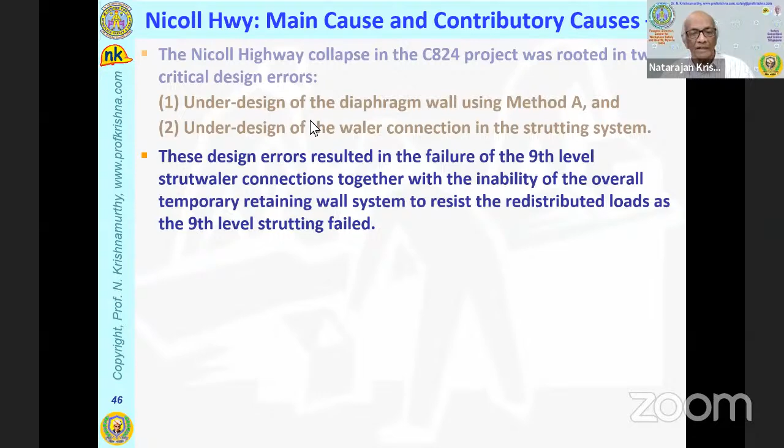Anyway, people make mistakes. Even the brightest people make them. God help me, I'm not him. But for the grace of God, I could be him making that mistake. Each day I come out of a successful case, I thank God. Don't enter it. Don't undertake unless you are sure, unless you have control, unless you take the extra time beyond what you are paid to check it out some way different from the program. Anyway, I think I'm sharing a lot of what I learned.

Collapse developed progressively. Failures to demonstrate the necessary level of care. The ground people reported everything. It was never the worker's fault. It was never the supervisor's fault. It was never the instrument man's fault. They reported everything. It was the middle management that missed the red flag.

Of course, this international committee found who was to blame. You know, at this point, I've got to admit, what may look right to you and me as a citizen may not work all the time. There are two barriers. One, the court. The court must prove beyond reasonable doubt, any fraction of doubt, that the person to blame or the cause to blame is correct. Second, is it good for the country?

You see, that is very delicate. I'm not going there. I won't call it politics because politics is selfish. But there is something beyond that. Is it good for the country? Is it good for the government? Will it topple the government? Will it put blame and people will suspect and it will cause more problems than we accept what we are? So anyway, there are many, many reasons.

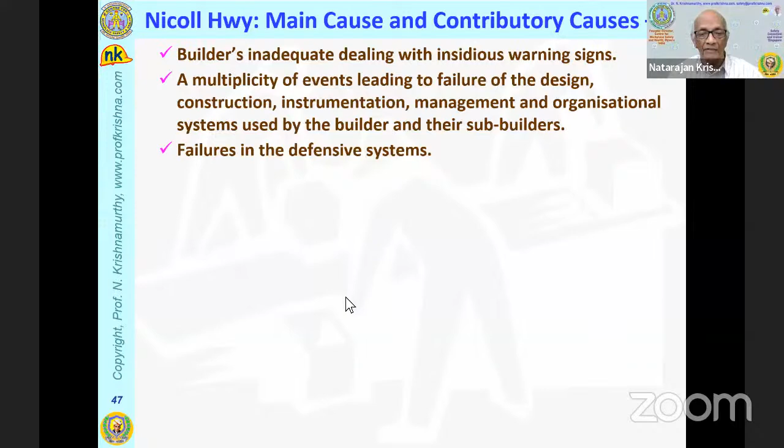Serious human errors, warnings of approaching collapse not taken seriously, and so on and so forth. And builders' inadequate capacity or ability to read the warning signs, multiplicity of signs, and then failures of the defense systems, meaning there are no backup systems, protective systems, no reviews, inadequate remedial measures, abuse of the back analysis, because when they found this, they should have checked the soil properties and then redid it, because some of the soil properties had also been wrongly judged.

I cannot blame them because soil is underground. You don't check every inch of soil. You check some bore logs and think that's true for everywhere. It's not true. So there are some things they forgot to do, and then monitoring, critical analysis, and so on. Now let me come to the next ones.

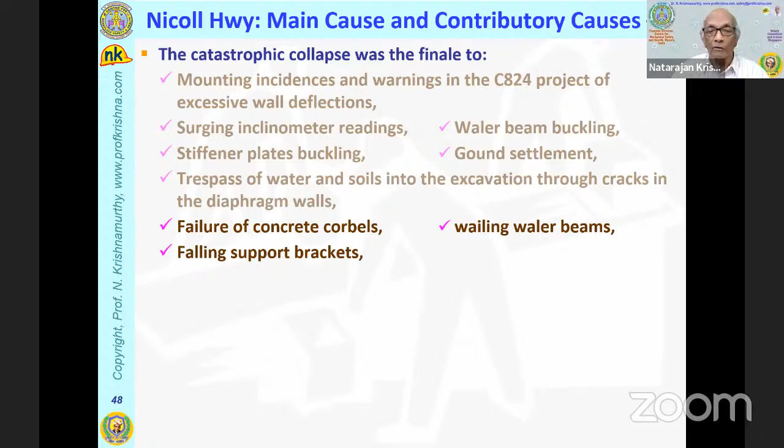Catastrophic. And then these were all the problems that happened. Surging readings, so it was difficult to keep up with them. Then trespass of water and soils into the excavation. Occasionally there were leakages and so on. Then corbels broke down. So many things. And more than anything, the workers knew it was going to fail because of the steel popping up, welds and bending, thung noises. And the safety officer had to come and relieve them.

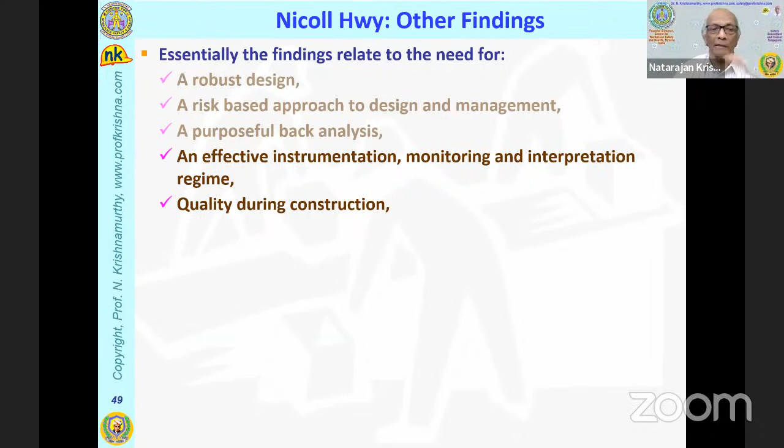One country's crew, because Singapore gets people from many countries, they left. We don't care for your jobs. But other people stayed. Luckily, it was lunchtime. Otherwise, more would have died. Okay, collapsed. And responsibility. You may be sure that the people who were irresponsible are punished, but some of them secretly, because the government will have an internal review and punish them internally rather than make a big newspaper thing out of it, because it's a small country.

And I'm not going to talk anymore. I'm not recommending it or criticizing it. Everything cannot be too open because you must think of public safety. I have another lecture where I'll say how public safety sometimes overturns the obvious things. So I'll pass through this, many unsafe acts. Now one more quickly.

This was 2006, a tunnel in Boston. I've been in Boston. I gave a paper there. A car was traveling with Mr. and Mrs. Del Valle, who were going to celebrate their 35th wedding anniversary. Suddenly, one roof slab fell on the car. The lady died. Instead of going to a restaurant to celebrate, they went to the hospital and the mortuary. And the problem was,

epoxies are always, I won't call them risky, I'll call them a specialized material, unlike concrete or brick or even steel. So the glue that was supposed to hold the suspension steel rod into the roof was epoxy. It was a new brand of epoxy. And to give them credit, they offered to train the engineers in curing it. And the engineers said, no, we have been using epoxy. We are on the forefront of epoxy knowledge. We have used it for 10 years. Don't worry about it.

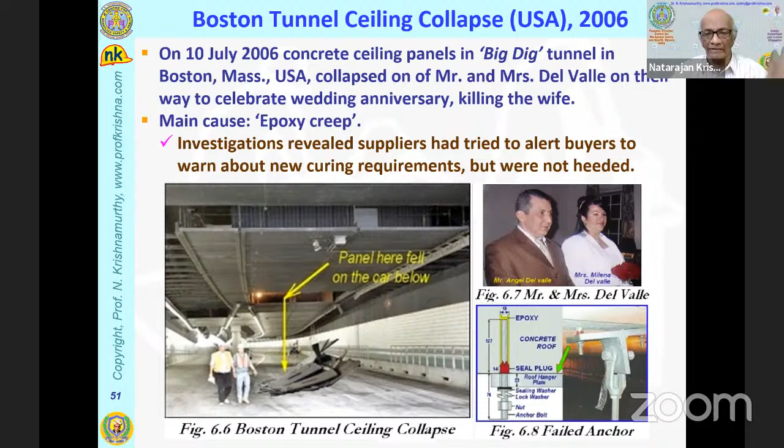The curing process was different from the other ones. They didn't care. Luckily, it was only one death. They then checked everything and redid the connections. That was one example. Then two funny examples. They are not funny. They are rather sad.

China has two extremes like India has. India is probably the best and worst of everything, whether it is corruption or structures, or, for instance, in space technology and computers, we are better than most countries in the world. So China has very elaborate structures, very complicated structures, things we cannot imagine, automation, and so on. And they are able to produce things which we can produce, but somehow we don't have the willpower to produce.

They built a bridge and removed the formwork. The whole thing collapsed. And they found, to their embarrassment, and luckily for us it cannot be covered up, there was no steel reinforcement in there. Almost similar to some engineer forgetting the dead load, this didn't have steel. Maybe the drawings omitted it or the contractor omitted it. When they removed the formwork, it collapsed. Very embarrassing.

Killing 36 people. Of course, it's very rare. I won't blame the country. It's just a human error. One more, this is even more embarrassing.

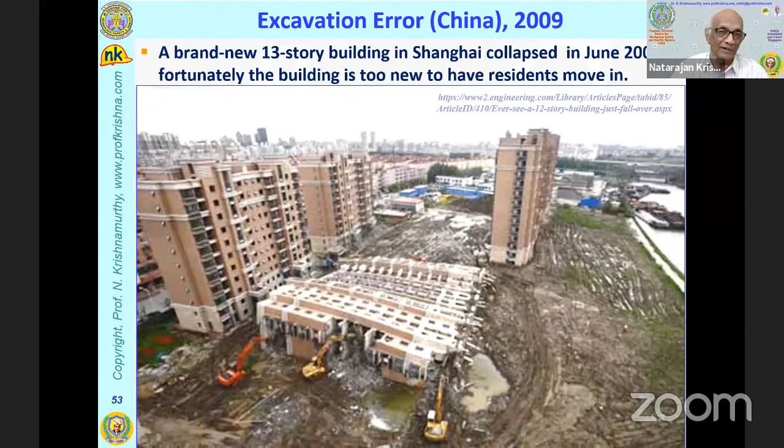You look at all these buildings. This block that is on the ground was exactly like that. One fine morning, it fell over. None of them got broken. The structure was so well designed that even after falling down, the floors were intact. If you could only turn yourself 90 degrees, you could live in it, except water won't flow. And how did it happen? Human error. I can call it engineering error.

So this was the building. They wanted to build another building next to it. So they dug it. First mistake. Second mistake, they put the thing next to this building. So double mistake. So here there is excavation. Here there is overload. And so the whole thing was weakened and it fell over. Embarrassing. But as I say, this was a very unusual thing.

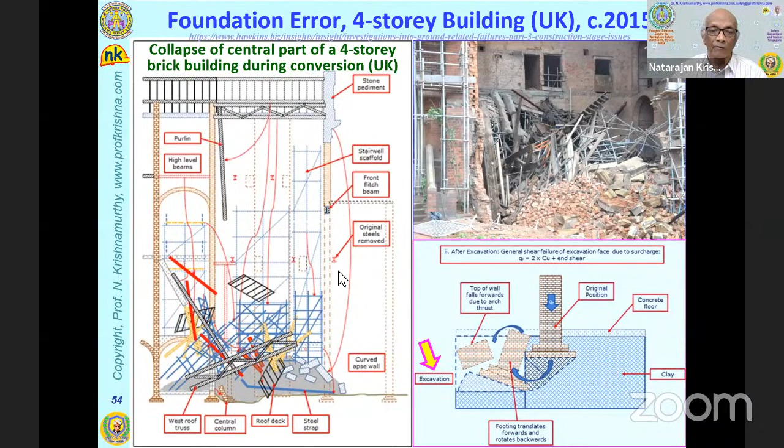And of course, there are other things, a 4-story building. And here they did, I wish I had time, a very nice forensic engineering analysis. And there again, excavation and insufficient protection to the foundation. I show this because now I am going to Indian situations where most of them are foundation problems.

So India, again, I tried to look for records. I found one in 1961 near Pune, and there it was a problem. See, in 1961, steel production was not so high and it was too costly. So instead of reinforced concrete, they thought that ordinary unreinforced concrete would hold, especially in a certain interlocked form. It did not. So that was a simple explanation.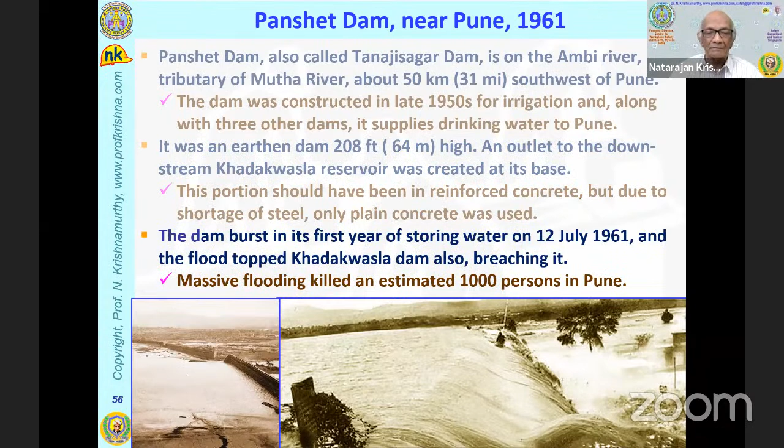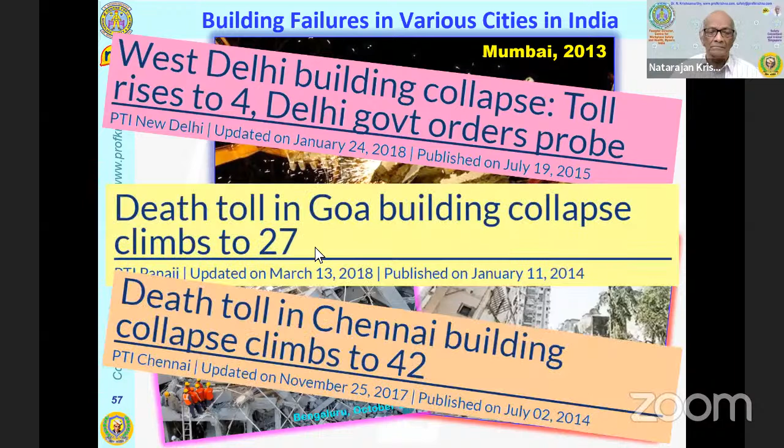They learned by experience. Now I see too many of them to analyze in detail, but I'll show you a few. Mumbai 2013, 2017, every city, it's not just one city, Bangalore, and then West Delhi, Goa, death toll in Chennai. And it was difficult to get full statistics until I found a couple of papers.

Gangaram building, I was born in Bangalore. I have gone to Gangaram. They were selling my book on computer graphics. This was their new building in 1983. And again, 123 people died. They had come up to almost the top level when it suddenly collapsed.

And then charges were filed and structural violations were found. 7 additional floors without a design. A 2-storied building was there. On top of it, they put 7. Because in the olden days, you had rock and then you thought the foundation could take an elephant or 10 elephants. So construction plans deviated considerably from the approved plans, as happens even today.

Unfortunately, I mean, this I understand because the judge cannot take sides. He will look at the evidence and he should have, beyond reasonable doubt, a cause to charge somebody with a felony or with breaking the law. So the judge found, they went to the Supreme Court, they still found that the evidence was not collected correctly. You see the problem? When you want to file a suit, you must have proper evidence.

Okay. Now, this operation was in progress. Let me come to my case studies. I got only 15 minutes. Again, I'll just flash through another, but this was done very well. This thing in Chennai, Trust Heights, there's a very good forensic study. The original explanation of the collapse was lightning.

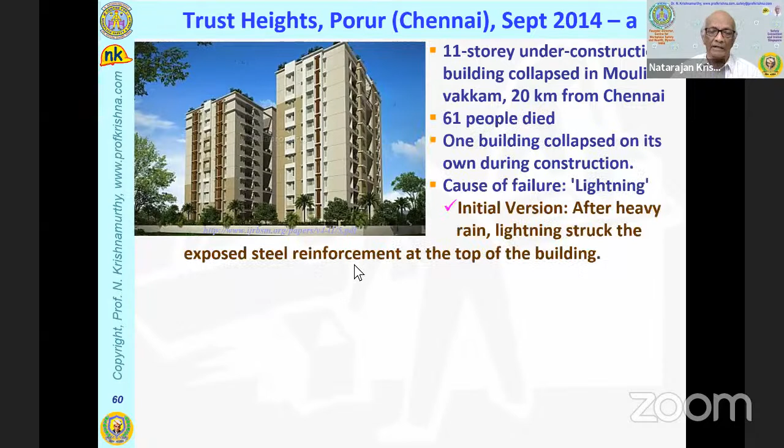They had a very convenient excuse. After heavy rains, lightning struck the building and the reinforcement connected everything and broke the concrete and it collapsed. Everybody said, oh, unfortunate lightning strike, what can we do? Then the forensic engineers came in. They did all the things, structural analysis, material analysis, impact analysis, every test, and I'm proud to say that they destroyed the other building also. They found that so many mistakes were there.

And that paper gives me the number of incidents of building collapses. This doesn't include dam collapses, bridge collapses. Building collapse, which country has the most? We can boast we have the highest number of building collapses in the world. Highest population, highest number of building collapses. And each building had at least one death on average per incident. So look at the numbers, almost equal.

Does it mean that only one person died in each? No, in some incidents, nobody died. In some incidents, 30 people died, 10 people died. But these numbers are horrific. We must stop them. So I hope this helps people stop that.

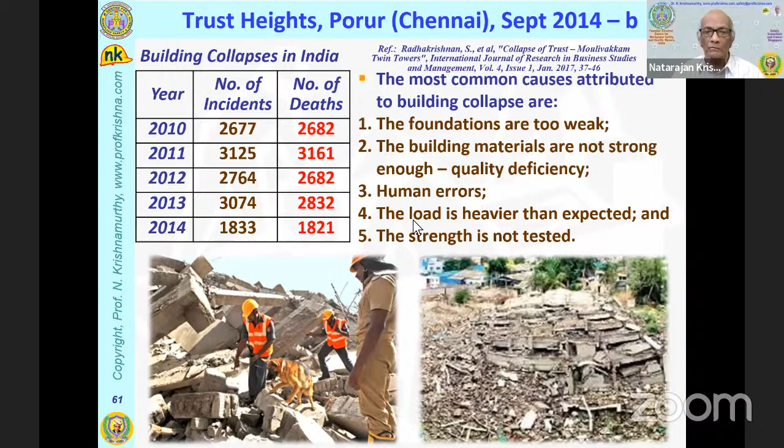But they found the foundations were too weak. Building materials were not checked for quality. There were many human errors. The load was heavier than expected. The strength of the concrete and other things were not tested. Okay. So this is the rubble. I've got to stop here, and this is very elaborate. I want to show one slide on the costs. The costs that we and the public see are just the direct costs.

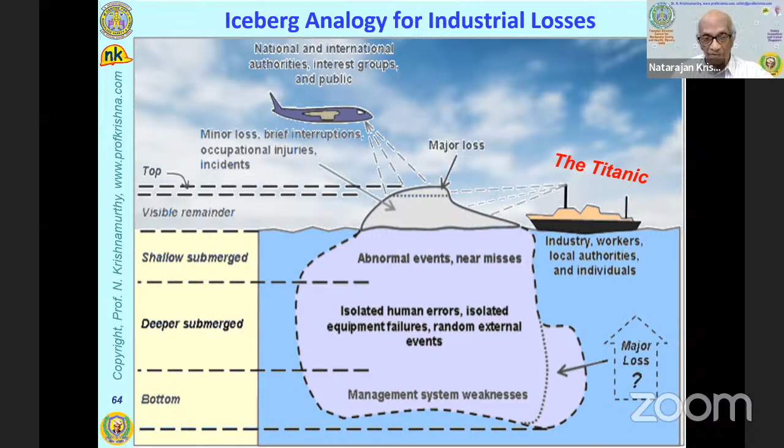Maybe health insurance, hospital costs, damage, and so on. But there are so many indirect costs, hidden costs, abnormal events, isolated human errors, management system weaknesses, and these cost 5 to 20 times more. So the cost of an accident is not just the accident cost. The cost of an accident is the direct cost times 5 to 20.

Now, I'll try to rush through this, sorry about that, but I get too excited about it.

Now, I mentioned that something does not have to fail. You can imagine the scenarios of failure. So let me rush through my experience of this. I was among the first to do finite elements in the USA, and I had already published some papers. So a city close to my university called my head professor and said, we want to set a new sewer pipe because our 60-year-old sewer pipe is insufficient. So we are laying a new steel one. We want you to check its safety.

So, okay, they sent me the details. They were going to bring a crane on top of this old one and lay this. This was their original plan. Okay, so I did a finite element analysis because there is no actual theoretical solution for this shape and so on. I had my university computer at my disposal. I created a model and found it was safe. I should have kept quiet. Not me. Because once you know failures, what are the possibilities?

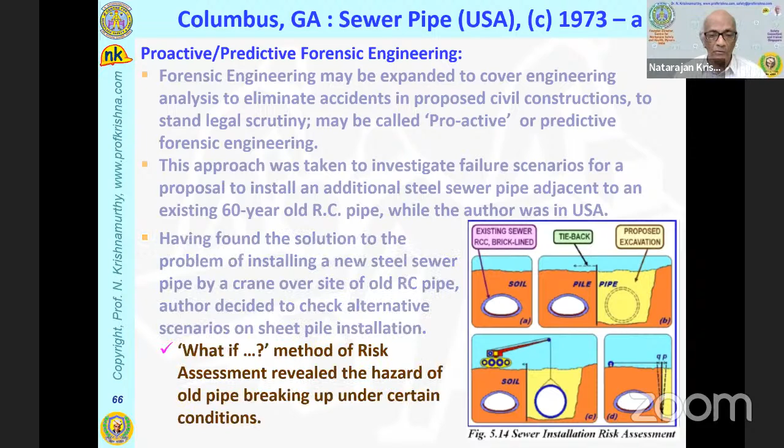What if the sheet pile for the excavation moved away or moved inward? So first alternate scenario, what if the pipe breaks under certain conditions? So I said safety, FE analysis was okay, slackening. Suppose the rope or the guy wire holding the sheet pile stretched 1 centimeter or half an inch or something. What will happen? Okay, I checked it. It was okay. I almost told them to continue.

At night, I could not sleep. I said I only considered it moving away. What if he over-tightened it? That is the what if. What if instead of a natural elastic slackening, he over-tightened it to allow for that slackening? So next morning, I rushed to the computer center, begged them to do my problem immediately and gave a negative displacement, and it showed it will pop up.

I called them and said, don't bring the crane there, because whether you tighten or loosen, I am not going to take the responsibility. I do not approve of this method. Come from the other side. Oh, it's another 30-meter drive, professor. I don't care. Either you do it that way or I am not signing. They did it, and thank God they have got a good sewer system.

Then the second one in Singapore. I have done many, but I picked only one or two for the structures. I may not leave 10 minutes for the questions, but let me rush through this.

In 2004, after the Nicoll Highway, a big 5-meter slab rebar cage collapsed, killing 2 people. I had just returned from another conference, and the commissioner somehow sent for me. The commissioner is like the director of safety in Singapore. He said, I want you to investigate. I said, why me? Anyhow, I was probably too modest. He thought from America, everybody comes with all the knowledge. I agreed. And to cut a long story short, there's a lot of coverage, and I took 1.5 years to do that and presented a lot of data.

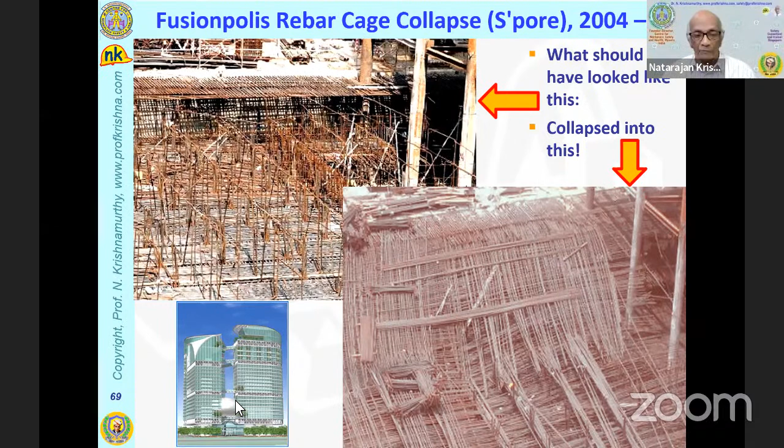So the actual problem was, this was a re-erection afterwards. So what should have stood straight like this collapsed like dominoes because of lack of bracing. Straight, bracing, diagonal missing, so it collapsed. This was the building, the foundation for that building. Then this was the actual collapse scene, and I have some pictures of it. The rescue scenes were like this. A cage went down from the top, picked out the dead and the injured people, and brought them to the surface. And then I show a few slides.

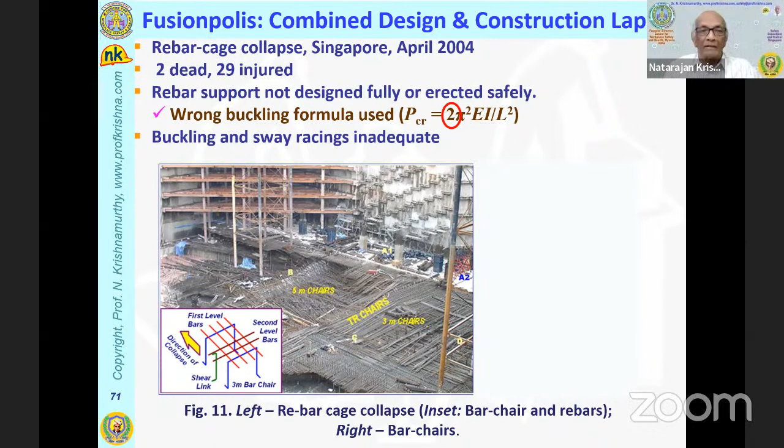The formula they used was wrong. A PE put his chop to it and signed it. Pi squared EI over L squared is the normal buckling load. He put 2. He didn't know why, because the new recruit had thought that both ends were fixed. How can you fix a temporary structure? Anyway, that was one problem. And then there are so many problems.

Instead of giving a vertical support, he gave an inclined support. He said, I had longer things, so I put it inclined. I said, by putting it inclined, you are giving it a tendency to move. It should remain straight. And so buckling, everything was wrong. And I took a lot of time.

And then the judge and I got along very well. I gave evidence, and the judge said, okay, professor. Now he was a civil engineer, incidentally. I have a question. Suppose this column broke, would it have survived? So overnight, I ran a bunch of analyses. Now this did not need a mainframe. It could be done on a PC.

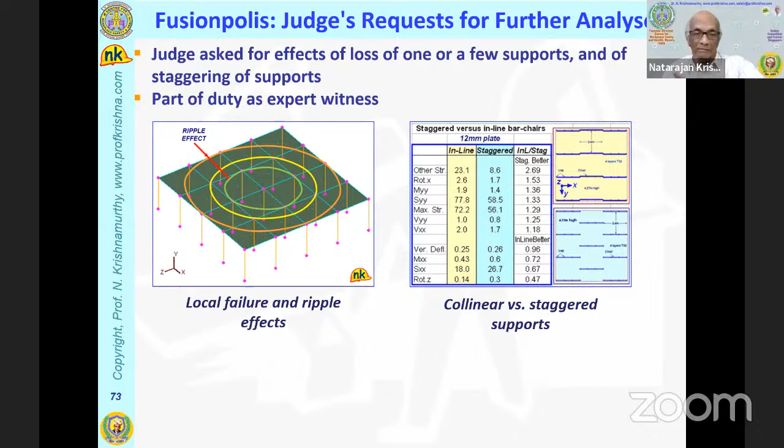I had a good friend, and I had this big computer program. So I did whatever the judge wanted. And the next morning, is this all, professor? I said, I didn't sleep last night. He said, do you know, professor, I didn't sleep last night because I read your report.

Then I also conducted some field tests. The opposition, the defense had conducted field tests through a university spending $25,000. I did the field test spending $50, including the salaries of the 2 people who helped me. I don't have time to go into it, but it's very funny because I used a spring balance. Remember, I am also a university man. I know all the instrumentation, strain gauging, and so on. They had spent $25,000. But I used a spring balance, and I came up with a dramatic result.

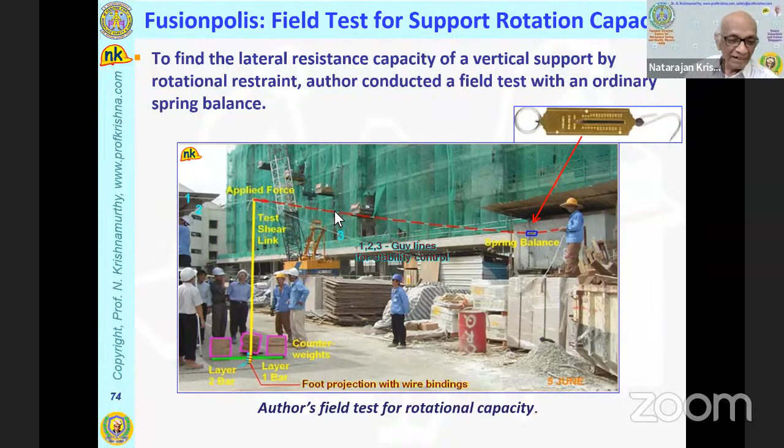What is your aim? Anyway, I did many finite element analyses, and I spent a lot of money. The government reimbursed, of course, and then a lot of time, effort, help with some friends and with a company I know. And then finally, they found that the design was faulty, erection was faulty, and I insisted, just like the international committee insisted, that the factor of safety for temporary structures must be higher than the factor of safety for permanent structures.

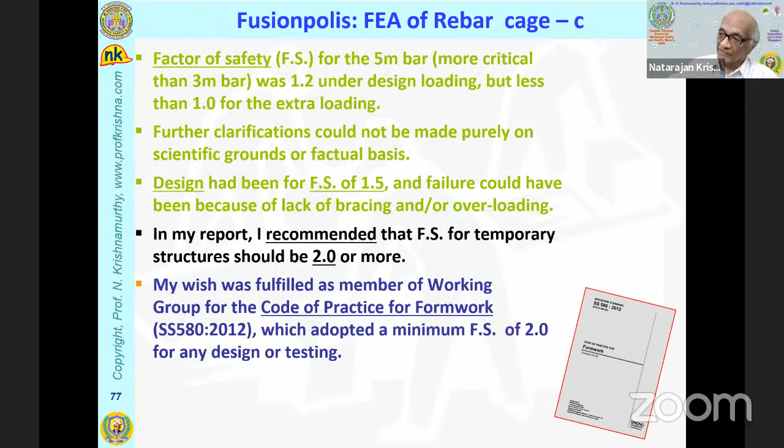And my wish was fulfilled when I joined the committee for the formwork design code of practice, and we were able to raise the factor of safety for formwork to 2 as against the scaffold factor of safety of 1.5. Anyway, I'm running out of time. So many interesting things. Maybe I should stop here.

And about computers, I want to only remind you that number 1, you need to know the program. Number 2, if it is a program and you have an idea, get the help of somebody familiar with inputting the program. I'm not talking about the theory of the program or the explanation of the program, but input. A single digit in a wrong place will give you a wrong answer. You cannot find it when the output is 2 inches thick and you have to examine 2,000 members.

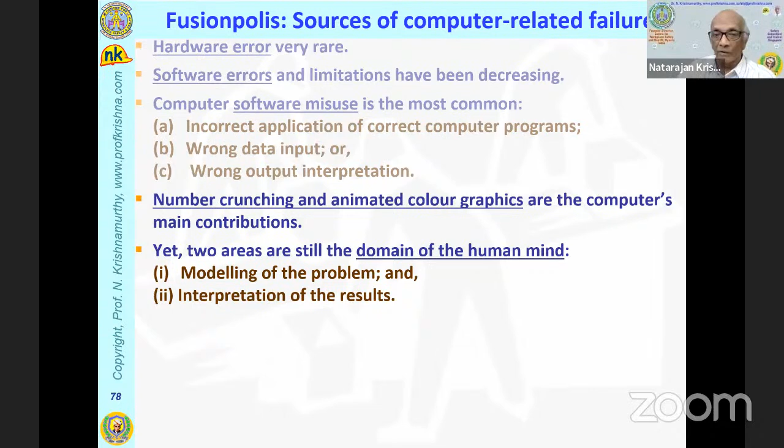You cannot do that. Anyway, I had photographs to help me, how they were not straight, they were already bent, how theoretically they were supposed to tie, and the university in their tests tied every other joint, while in practice there's only occasional joints. All this I was able to prove by photographs at the court, and then they found the other persons guilty.

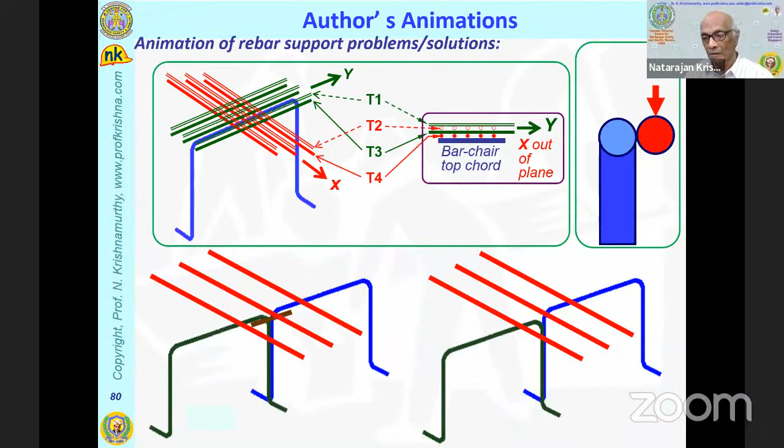Of course, I had also lots of computer PowerPoint presentations and even an animation to show how they cannot rest one round rod on another rod. See, it jumped suddenly, but I showed it gently slipping here. Anyway, even some other animations I used like that. And of course, I'll skip this. I'll stop here. If there are no questions, I'll show this case. Okay. I'll hand over the program.